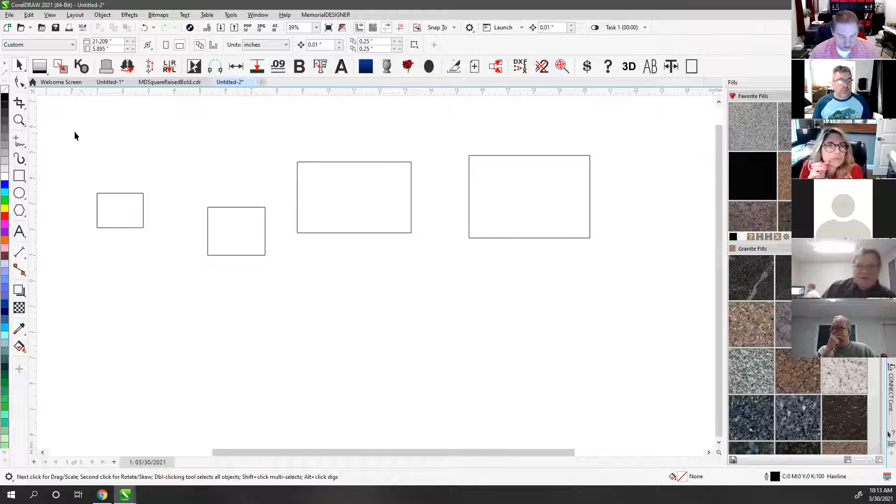Okay, so next is the orientation of your page, whether it's portrait or landscape. I'll turn on the page border so you can see. Portrait is going to rotate at 90 degrees, landscape is going to keep it the way that it was. I'll go back to having a letter size page just so you can see better how that works. So that's if you want to print it out portrait, and that's if you want to print it out landscape.

The next button is if you want to resize the page. So let's say we wanted to do a specific page of 12 inches by 12 inches and we hit enter. This button is whether or not you want that to apply to every page in the document, or the next one over is to apply it to the current page as opposed to all the pages.

So if we had multiple pages in our document, I'll just make a few extra pages down here. I could go to page 2, and let's say page 2 I want it to be 6 inches by 6 inches, and it's going to resize that page to 6 inches. But because I clicked on current page only, it shouldn't have changed this one - so this one's still at 12 inches. Page 2 is set for 6 inches, and 3 and 4 should still be at 12 because that's what they were before. So that's what these two buttons do - they control whether you want to change all page sizes or just the current one you're on.

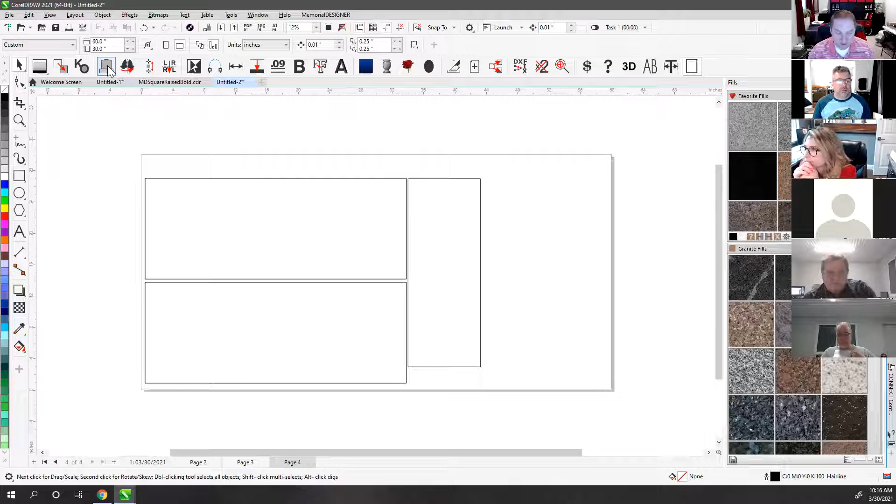So that's another thing that I would use pages for. There's definitely use to pages, but when I'm doing design work, when I'm putting together my shapes and that sort of stuff, I find that the page border itself gets in the way. So I turn it off while I'm doing my design work, and then I only turn it back on when I need to output to something specific.

The next one over is units, and that's just whether you live in America and want to use inches, or whether you're sending things off to Europe or Asia and need to go to different units. There are all sorts of units in here that you'll never use, that I've never used, and maybe I don't even know what half of these are. Ciceros and Didots, who knows? I mean, I could look it up, but they're not things that I'm going to use. Most often I'm using inches. If I'm doing things overseas, I'll use millimeters. And then if I'm doing things web-based, I'll use pixels. That's about all I ever do myself. But you can certainly use the other ones if you ever wanted to.

So if I was drawing in inches and I was going to send something to somebody in millimeter land, if I change that, that's just going to convert that over, right?

Yeah, so the way that units works is this is the units for your document. So if you switch it over to millimeters, everything now in this document is going to show up as millimeters. And it's going to save that way when you save the document, as millimeters being your default. So whoever opens it up on the other end is going to see that it's in millimeters. So if you get stuff from China or whatever, it'll often come in as millimeters because that's what it is. But you can always go up and switch those units over to inches so that you can see what they are in your standard measurement.

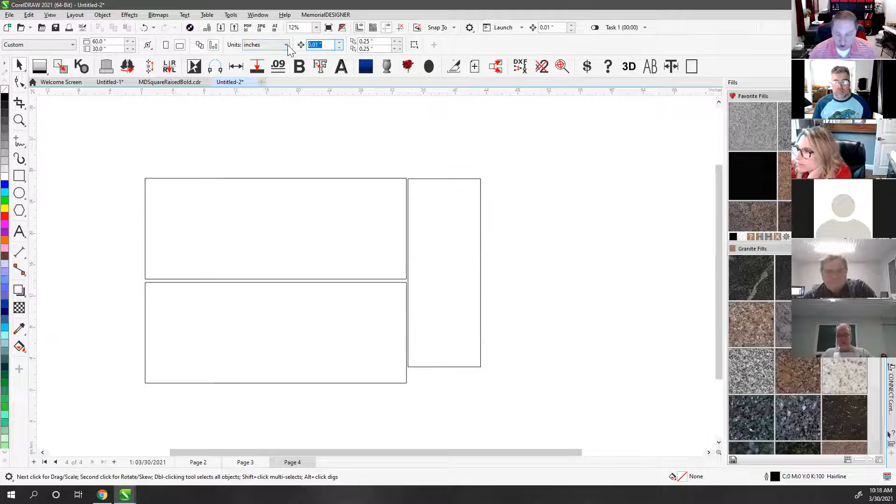The next thing over is called your nudge distance. Nudge is the distance for moving objects with your keyboard, the up, down, left, and right arrows. By default, CorelDRAW has a 0.01 inch nudge, which for me is too small. So I will usually change it to a quarter of an inch. That way, when I grab an object and hit the left arrow, every time it moves, it's going to move a quarter of an inch.

I can show you that here if I change my axis to 0, 0. So this is now at 0, 0. If I push to the left once, it's now going to be at -0.25 because I've nudged it once. If you hold Control, you can do a micro nudge, so that's going to be half that amount, or 1/8 of an inch.

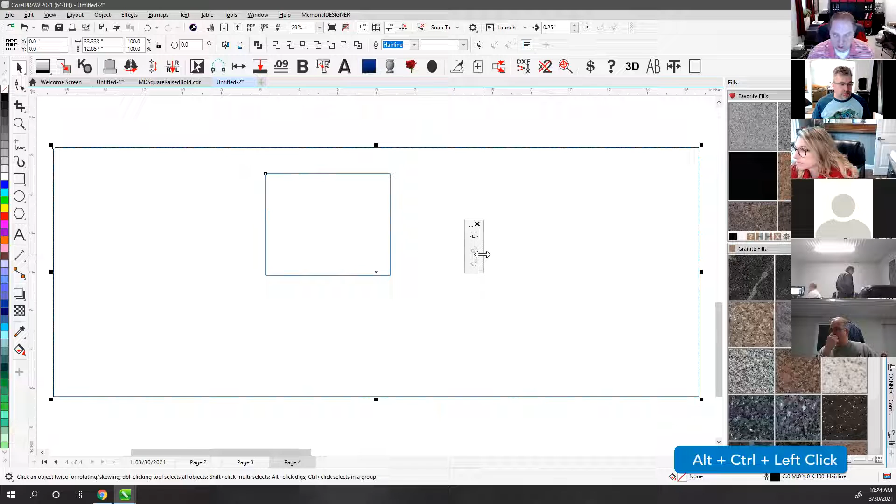To do that, it's the same kind of workflow, except instead of dragging onto a current toolbar, I'm just going to hold Control, Alt, and drag out here into the workspace, and that will create a new toolbar for me. Then I'll do the same thing and keep going to create my new toolbar. So now I've got a new toolbar—it just gets named automatically 'new toolbar.' You can rename it if you want to.

You just click on the blank space of it, say customize, new toolbar, toolbar, and say properties. And then that's going to go into the properties of that toolbar for you.

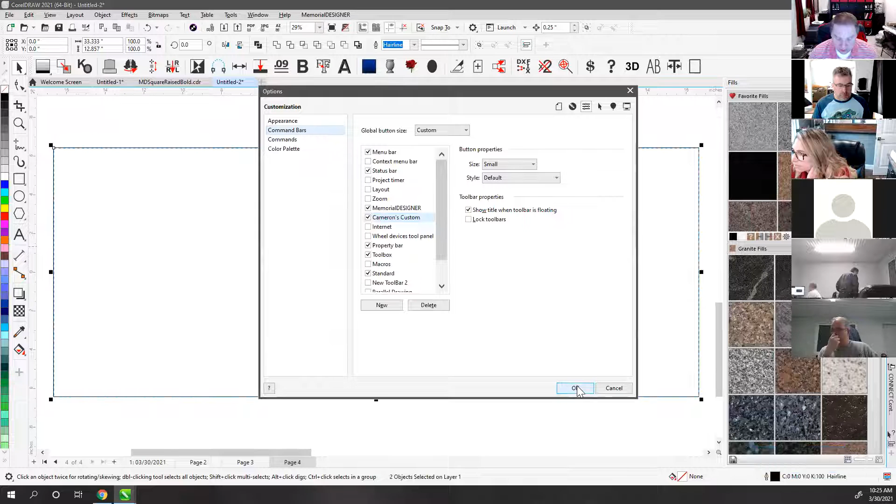And now I can double click, and you just kind of click and hold, and then I can rename this as Cameron's Custom or something like that.

So then I've got my own toolbar that I can mess with and add anything I want to it, and throw up here and place it where I want to. The reason it's not showing up is because I've got this little hidden toolbar up there, but now that I put it up there, I've got this toolbar right there.

So I don't really need these ones anymore. I'm just going to hold Alt, click and drag off onto the workspace, and what that will do is what it's supposed to do. Give it a second here. Come on.

Let's see if it works. Holding Alt, click and drag. There we go. So clicking and dragging, you'll see the cursor changes to an X, and that's because I'm deleting it. I'm just pulling it off and getting rid of it. So by holding Alt and clicking off into the workspace, you're getting rid of those toolbar icons.

That's why you'll always want to hold Alt, otherwise you're moving things around, right?

So now I've got my own toolbar here that I can add stuff to, and it's not going to mess with anything else. That way, you can also export out your workspace. You can save your workspace and that sort of stuff, so that you've always got this toolbar that you like, so that in future versions you can bring in your own toolbar.

Because every time you install my workspace, it's going to overwrite the workspace, and so your customizations aren't necessarily going to be there. So you either need to export your workspace as your own, or individual pieces from that workspace. But yeah, so that's how you can do that if you want to.

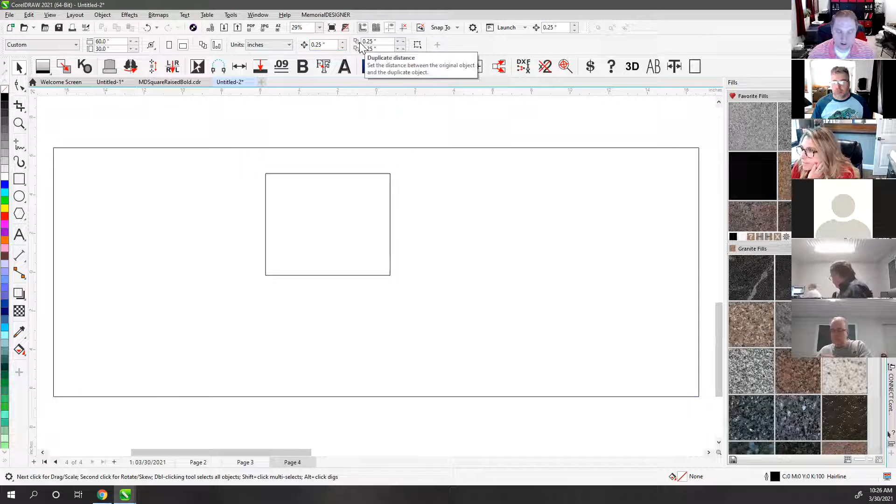So we've got our nudge distance. And then the next thing over is called the duplicate distance. If you have an object and you go up to Edit and Duplicate, or Control D on the keyboard, what that's going to do is make a duplicate of your item, but it's going to make it this far away from your original.

So we've got it set to go a quarter of an inch to the right and a quarter of an inch up. That way, every time you duplicate, it's going to move that much. So if I change this to 10 on the X and 0 on the Y, and then hit Control D, it's going to make a copy of it over here 10 inches away. I don't actually use duplicate a lot, but that's what it does if you want to use it.

And the last thing on here is treat all objects as filled. This is obviously an overlay that they're putting in that we don't have yet.

Hey, David. Yes, I think we're getting some background noise from you. If you could just mute yourself, unless you were talking to me. I think it was you, because you're the only one that's not muted. Thank you, sir.

So what treat all objects as filled does is it works as if this design had a fill in it. Right now I can't click it because it has no fill. But if I say treat all objects as filled, then anywhere I click inside of this object, it's going to select it as if it had a fill. I don't particularly like that, because I find myself selecting things more often than not that I don't want to select, which is why I turn it off by default. But that's what it does.

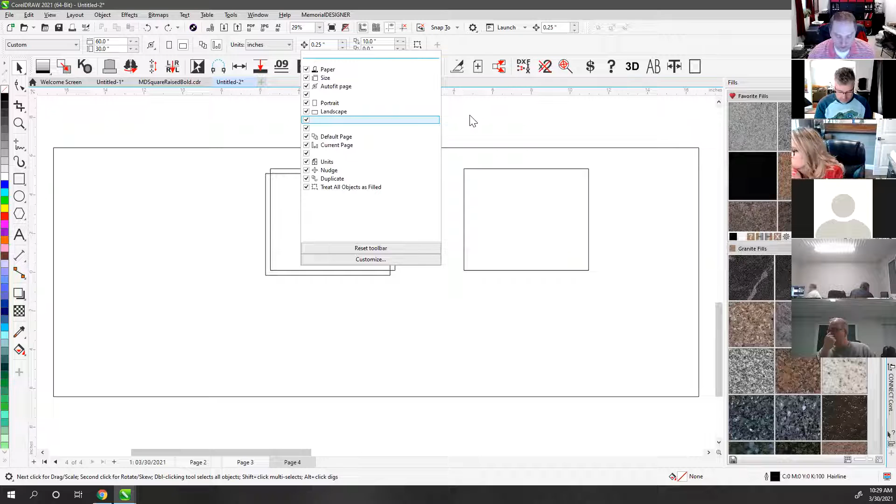Okay, any questions on that stuff, on the property bar?

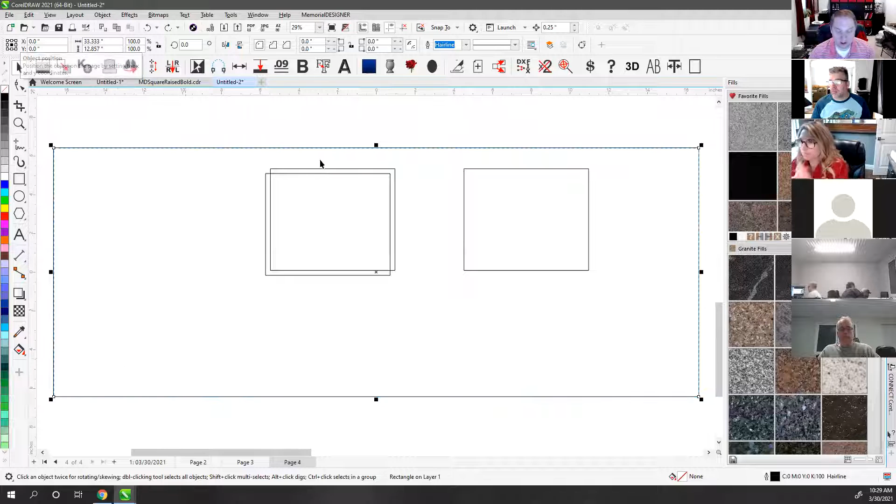Okay, so what you'll notice is as soon as I click on something, that property bar is going to change. Now all of a sudden I've got a whole bunch of other stuff that wasn't there before. I don't have the page stuff anymore, but now I have this, for instance, the object origin. So we're just going to talk a little bit about the property bar for selecting standard objects.

I'm going to draw a couple different things here so you can see. If I click on this line, or if I click on the rectangle, you'll notice some of these tools change. The reason for that is because the properties of this object change and they allow certain things to happen that other objects don't. So this is going to change often, based on the thing you have selected, based on the tool you have selected.

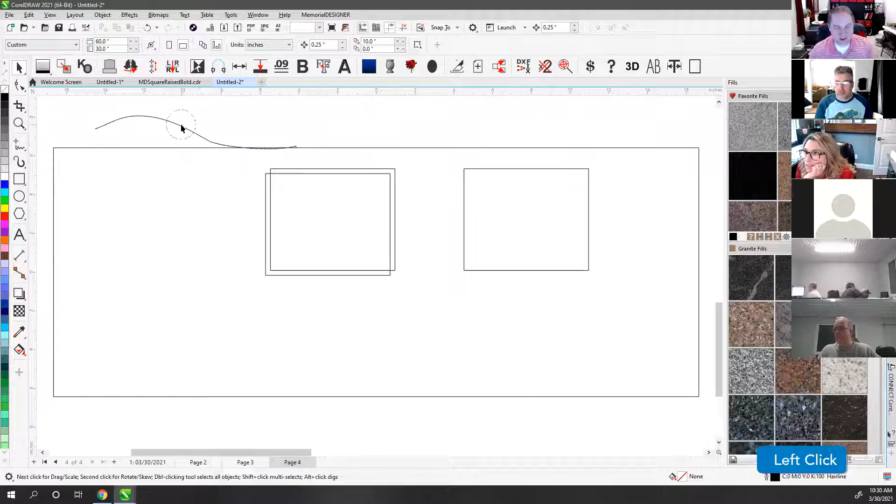So if I select a shape tool instead, it's going to give me different options as well. I would guess probably each one of these different scenarios would need to be a video all by itself because there are so many different things it can do. But we'll just talk about a couple of them today.

So the first one is, if I were to just select this rectangle, for instance, we've got up here something called object origin. The object origin tells, when you are resizing things, how it needs to grow. So right now it's growing or shrinking from the center. If I were to change this size to 10 inches by 10 inches and hit enter, it's going to stay so that my center stays where it's at.

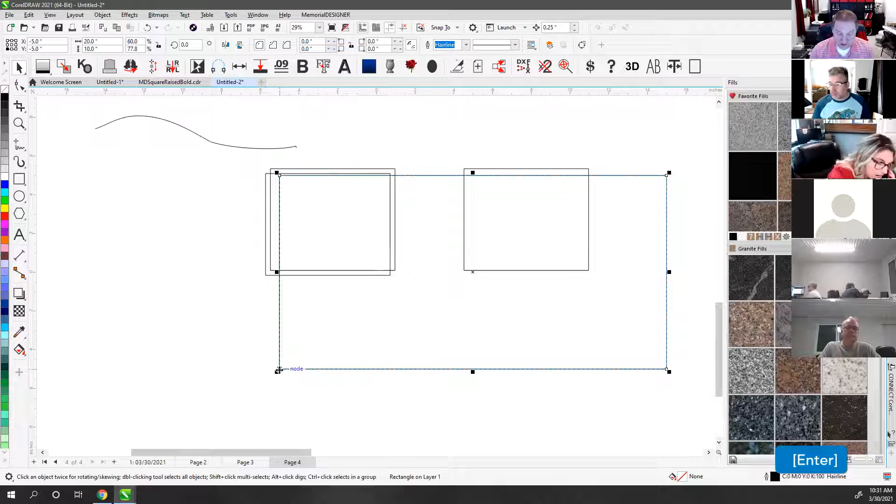If I change the object origin by clicking on one of these 9 boxes, that becomes the origin. Now my lower left-hand corner is the origin. So if I change now to 20 inches wide, it's going to stay here at the lower left, but grow to the right. If I change it to 20 inches tall, it's going to grow upward instead of how it was before, based off of center. You'll also notice that it changed what are called your object position, which is your XY coordinate.

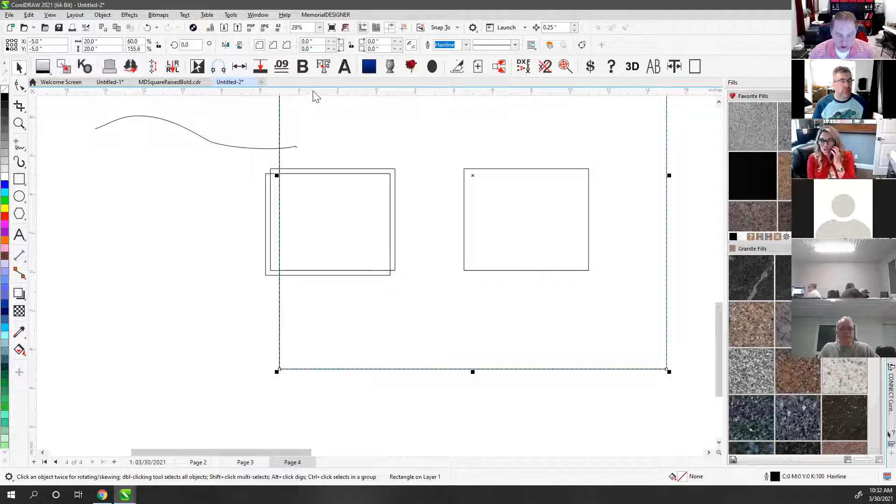If you look at your rulers, this is the coordinate of your origin. So if we look at the ruler here, 0 and 0, our object origin is -5 this way and -5 this way. And so that's the bottom left-hand corner of our object, is -5, -5. If we wanted that to be at 0, 0, we can tell it to be at 0, 0 in the bottom left-hand corner, which then changes all of these numbers. Depending on which one we click, it's going to change because that's how big our object is.

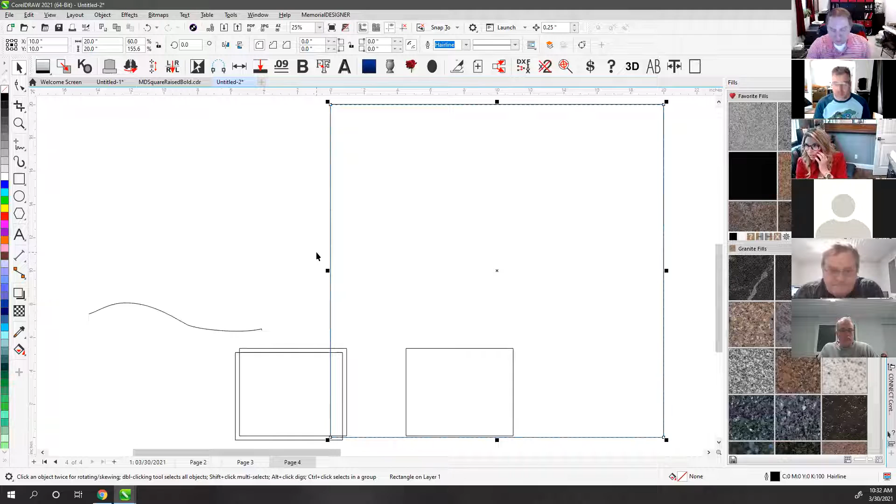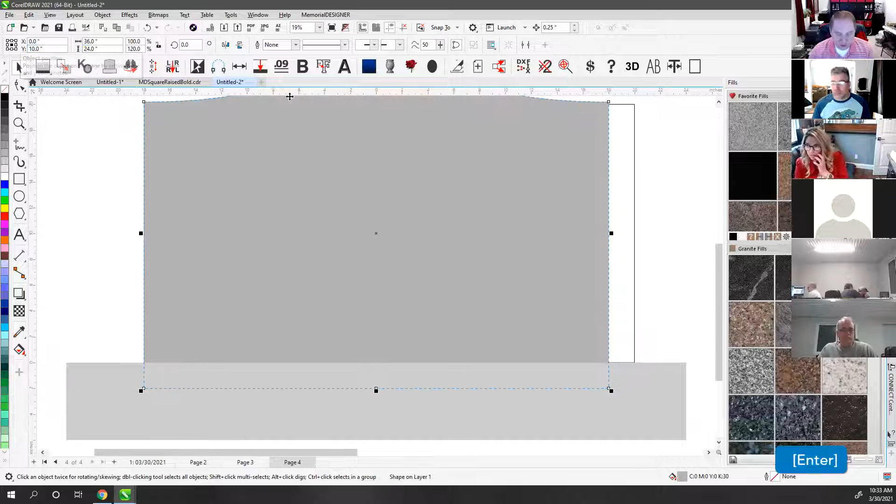The reason you would want to use this more often than not is because you want to size an object to a specific size, but not move it in a certain direction. So for instance, let's just say I had a shape like this. I started with my shape builder and I wanted to make this taller, but I don't want it to go down into the base. If I just made it taller right now, let's say I made it 24 inches, it's going to go up by 2 and down by 2. So now it's going into where the base is.

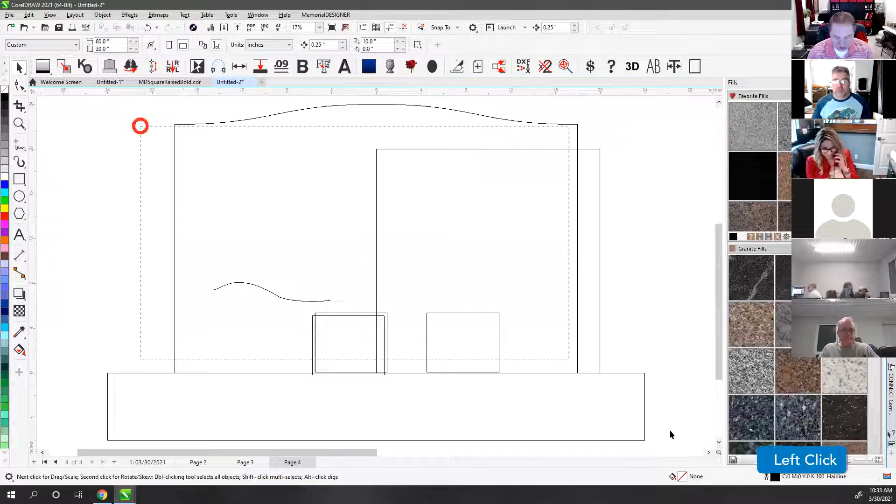So if I undo that and instead change my object origin to the middle of the bottom, then as I change this size, it's going to only grow upward as opposed to any other direction. That's one use case for why you would want to use object origin. Get rid of the rest of the stuff. Again, that's not going to show up unless I have something selected, because when nothing is selected, there is no origin. So I have to have something selected in order for that stuff to show up.

The next thing over, like I already mentioned, is your XY coordinate. So positive is this direction, negative is this direction, same thing for the Y axis. Y is up and down, X is left and right. Those are where they sit on the ruler. This is how big the actual object is. So it's 60 inches wide by 30 inches tall, and that's at the tallest point, which is this point here. It's not giving us how tall it is to the edge right here. It's giving us how tall it is to the tallest point.

One nice thing about these is you can do math inside of them. You can change your units inside of them. So we had talked about going from inches to millimeters before, which is nice.

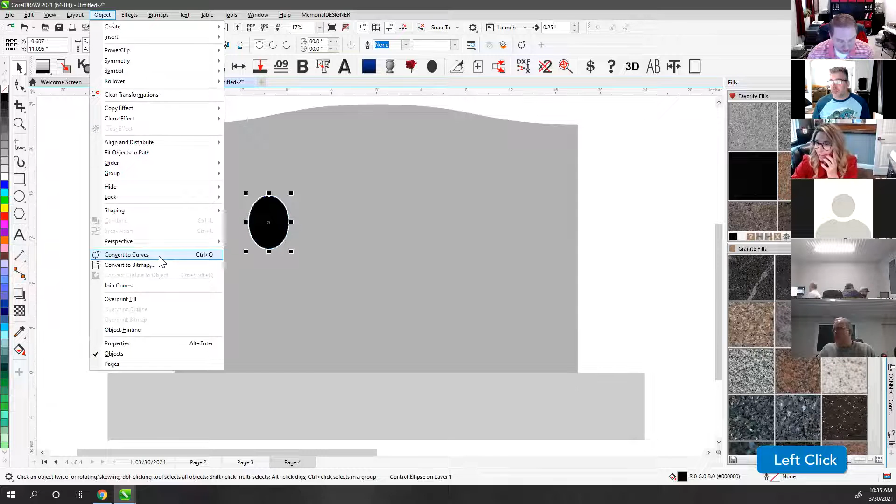But if you wanted to do that on the fly, let's bring in a ceramic really quick. I'm going to click on the ceramic button, and that's going to bring in a ceramic for us. I'm only going to get to the very inside of this, so let's clear my contour so I'm only showing the very middle portion. So I've got this oval, and right now it's 3.543 by 4.724.

The reason that's such a weird number is because it's 9 by 12 centimeters, and it's doing the conversion automatically. If I wanted to stay in centimeters but don't want to go back and change my units, I can simply type in 11 and then cm for centimeters, and let's say 15 cm, and it's automatically going to convert that into inches for us.

If we wanted to do any sort of math, let's say we wanted to make sure it's 0.09 inches bigger than what it currently is, so we've got extra room to blast it deeper or something. You can do a plus sign and then 0.09, and do the same down here, a plus sign and 0.09, then hit enter, and it's going to do the math for you inside that box to make it grow the size you want. So I like that it's got that option to convert units and everything else right inside those boxes, which is really nice.

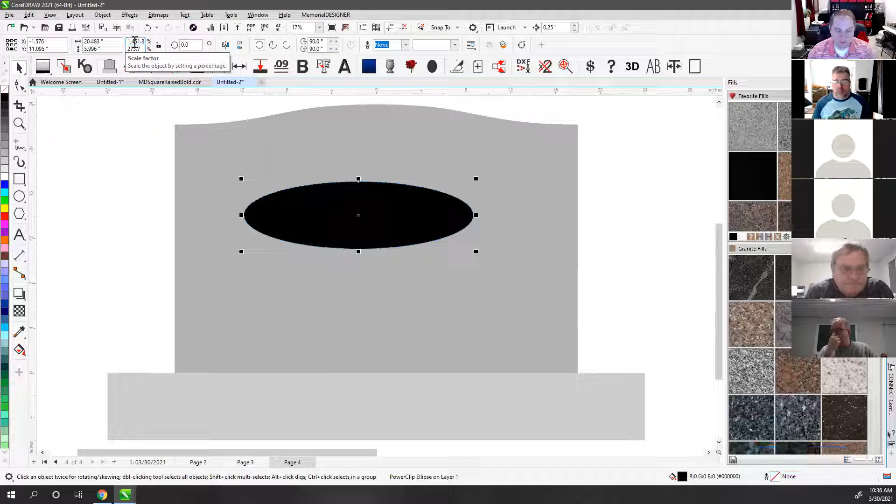The next thing over is your scale factor. That's how big it is compared to how big it used to be. We've resized this, which tells us it's been scaled. If these numbers aren't the same, it means it's been stretched. So if I stretch this out, you'll see that number gets bigger than this one, which is an indication that whatever you have has been stretched in one direction.

If you want to resize things and make sure they do not stretch, if I just type in 6 here, you'll see it's going to stretch. If you don't want it to stretch, there's an option right next to this lock ratio, which is going to lock that so it has to be proportional. That way, if I change this to 300, it's going to change this one proportionally so it doesn't stretch at all. Or if I change this to 4 inches, it's not going to stretch at all, because I have my proportions locked. If I don't want to lock my proportions, I've got access and control over how big I want this to be exactly.

So that's what the scale is, and that's what lock ratio does. I added in the most recent workspace the keyboard shortcut Control-Shift-X, so I can lock that ratio on the fly. If I want to, just hit Control-Shift-X, it's going to lock it so that if I type it in, it's going to be proportional or not.

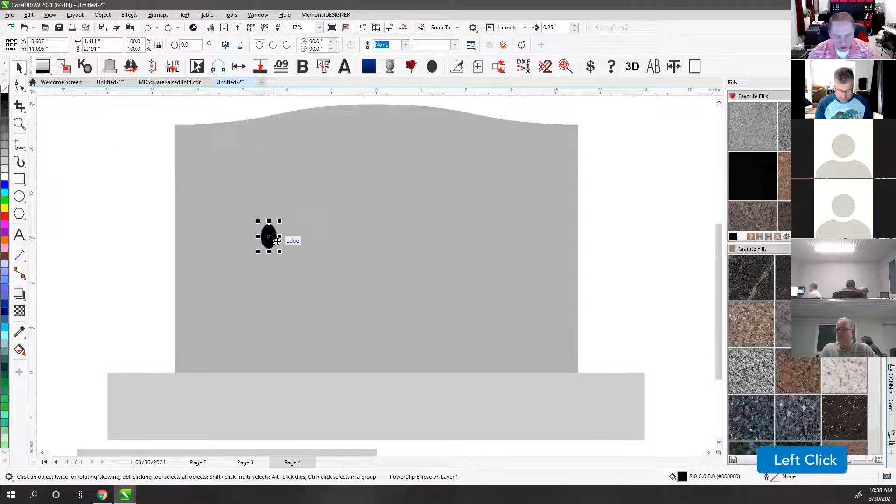The other reason for that is I added the ability to do Shift-X, and by doing Shift-X, it actually pops up your object size right down by your object, as opposed to having to move up to the bar. So I can just hit Shift-X and say I want this to be 7 centimeters and 13 centimeters, hit enter, and it's going to resize without me having to move my mouse up here, which is kind of nice.

And that's, again, I think only in my 20 - actually, I don't remember. I just know it's in one of the most recent workspaces. It's not in my older ones.

Next is angle of rotation. That's just if I hit 90 degrees or whatever, it's going to rotate 90 degrees. If you do negatives, it's going to go the opposite direction. You didn't really notice other than this node there, but let's say I do negative 45 degrees, so it'll rotate negative as well. If I click and drag, you'll see that update as I rotate it. This is just degrees, so that's what that means.

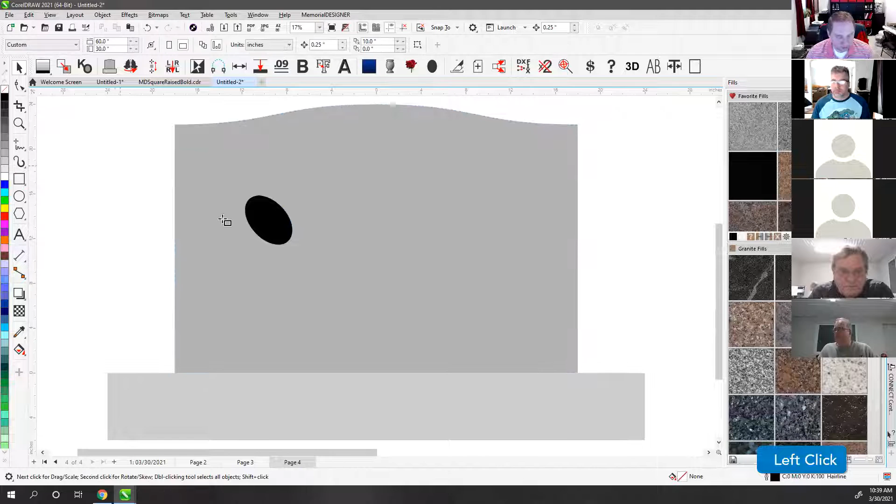Let's make sure. Yep, same thing, back on the rectangle, same things.

So the next ones over are mirror horizontally and mirror vertically. What mirror does is, if you have an object and you want to mirror it on itself, not on any other object, you click mirror horizontally and it's going to flip it on itself. If you click it this way, it's going to flip vertically on itself.

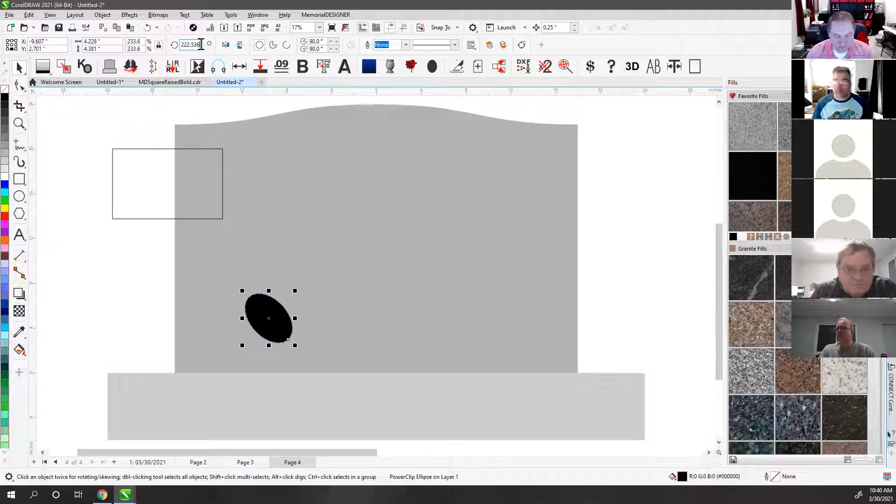Which it shouldn't actually do that. That looks to be like a bug to me. I'll have to play with that some more. But what did it do? It actually flipped. You see how it flipped further down? Oh, it shouldn't flip further down. It should only flip on itself.

Is that because of your location on the... Oh yeah, well, could be. The center ones? Yeah, that could be. You're right, I bet you're right, because of my object origin. Once a week I am right, and today I just used it. So that's not a bug, that's just me not knowing how object origin works.

Look, if I change it here, then I guess it's going to flip upward. That's cool to know, though. There you go, we all learn. Yep, good job, Charlie. Woo. I don't have to send up a bug report.

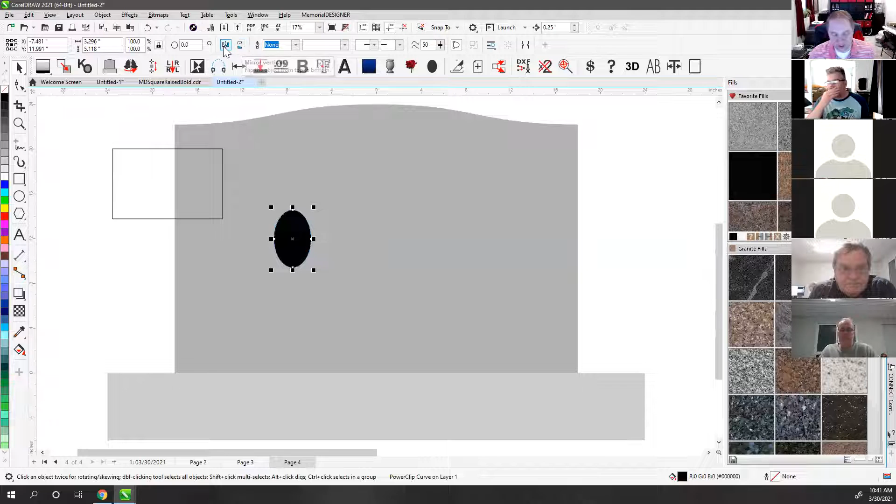So that's what that's doing, is it's flipping on itself, or on its XY axis, on its coordinate system, in either the horizontal or vertical direction.

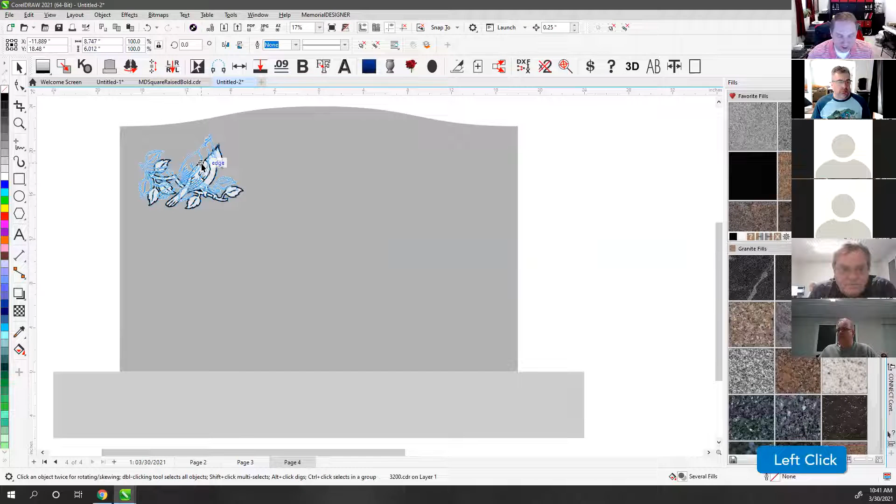So just to bring in a better example than a circle, if I brought in a design of a bird or something, and I had this bird here in the corner, maybe I want that bird to look inward, but maybe I don't. So if I wanted to flip it on itself, I would just click on this, and now it's going to be looking out instead of looking in.

So I think that makes a little bit more sense than a circle anyway. But that's what mirror horizontal and vertical do.

The next one over is our outline width. Unless I'm on rectangle, it's not outline width. So we're going to go back to having a rectangle selected, because rectangles have special options. And so that's why these show up, is because this is actually considered a special object called a rectangle. You can see down here on the bottom, it says rectangle on layer 1.

So it's got special options where it will let you change your corners with these options, and then you just choose a size. So let's say we want 1 inch for our radius. It's going to let you change that corner, whether it's a scalloped corner or a chamfered corner or a round corner, depending on how you have that set. And then these are your numbers for how you want the corners to be.

This is whether you want it to change all at the same time. So if I change this to 2 inches, it's going to change it all at the same time by that same amount, which in this case made it 2 inches larger than that one. So I probably want to do that.

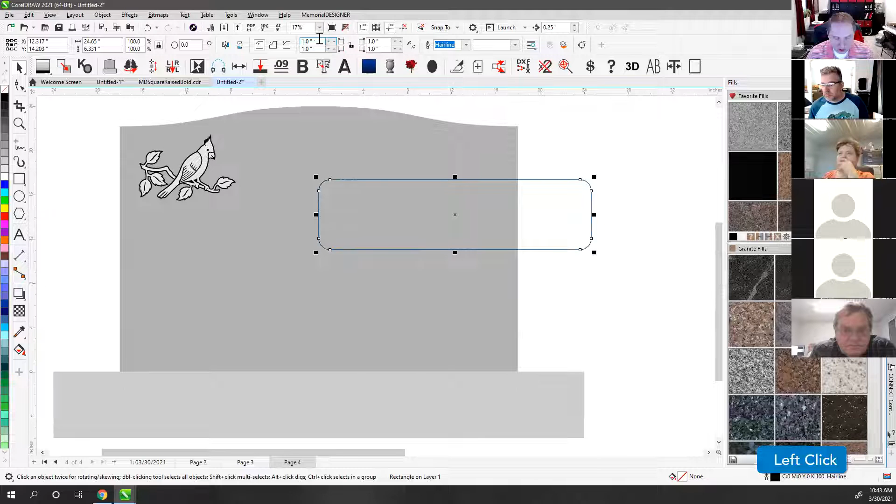The reason that happened, I believe, is because of this right here, which is relative scaling. If I had that unchecked, then I think what happens is, so I'm going to change one of these to a 3. Yeah, because then you can leave the bottom squared if you want even. And that's really cool for some nice shape effects and panels too.

Yeah, for sure. So I think if I change this one to a 4 now, we'll see what happens. I guess it stayed the same, but it relatively changed it the same amount. So that's what this does, is it's going to scale your corners.

Well, okay, let me say that again. Relative is, it's going to make it so that these corners scale as I shrink this down. It's going to scale it if I do that. If I didn't have that selected, then as I drop it down, I think it keeps those. All right.

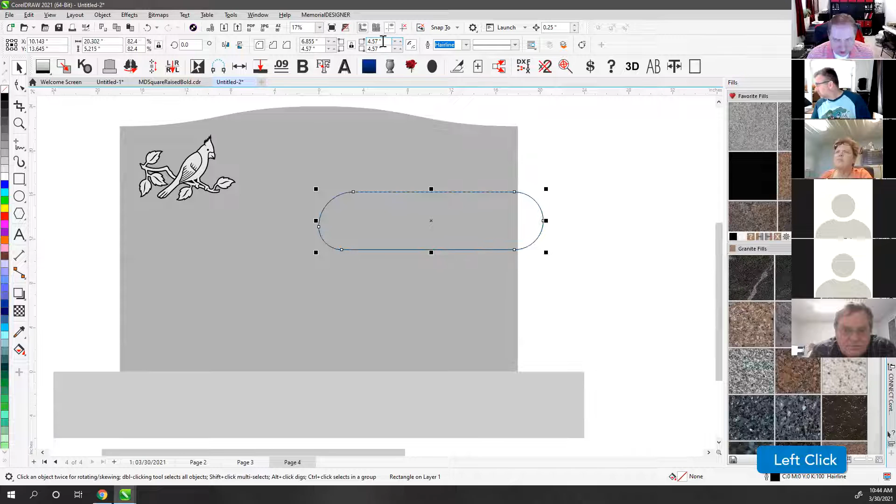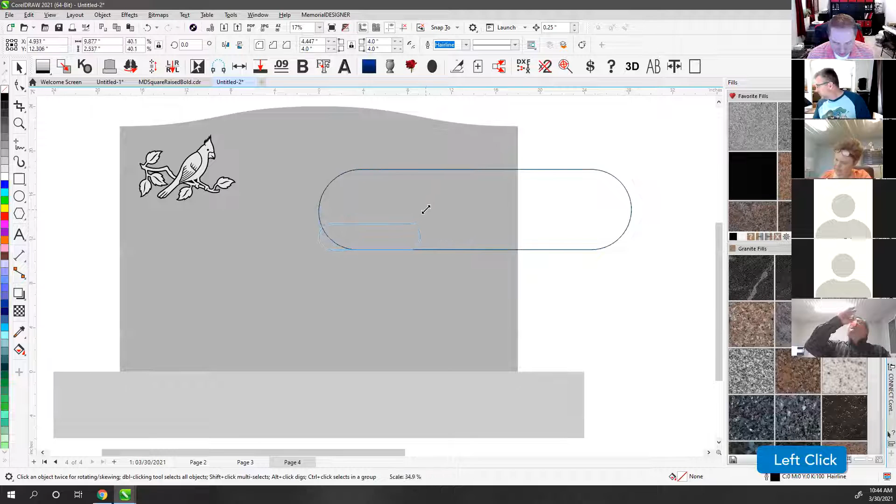That doesn't seem quite right. You can see my numbers moving here, right? But when you have this unchecked, they're staying the same. Sorry, they just didn't stay the same until I released it. So if I had this at 4 inches and scale it down, they stay at 4 inches. It's just so small that it doesn't matter. Anyway, so that's what scaling is, whether you want those to change as you resize your object or not. So you can check that and it'll resize.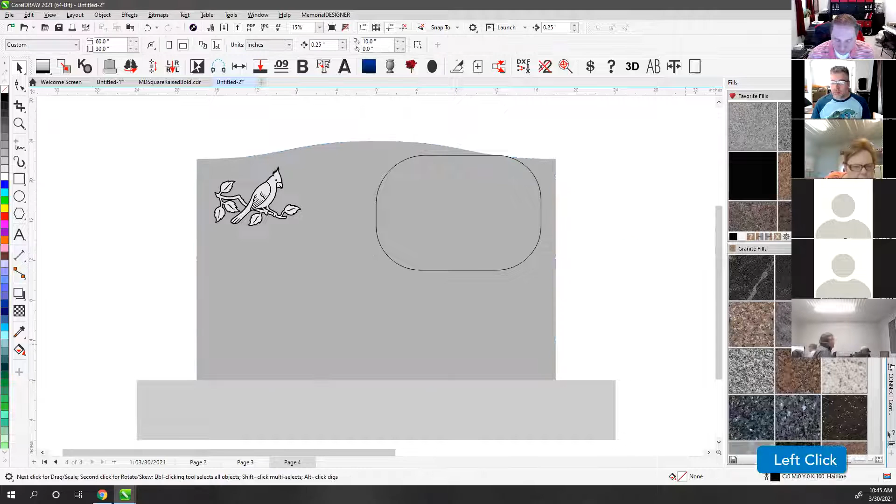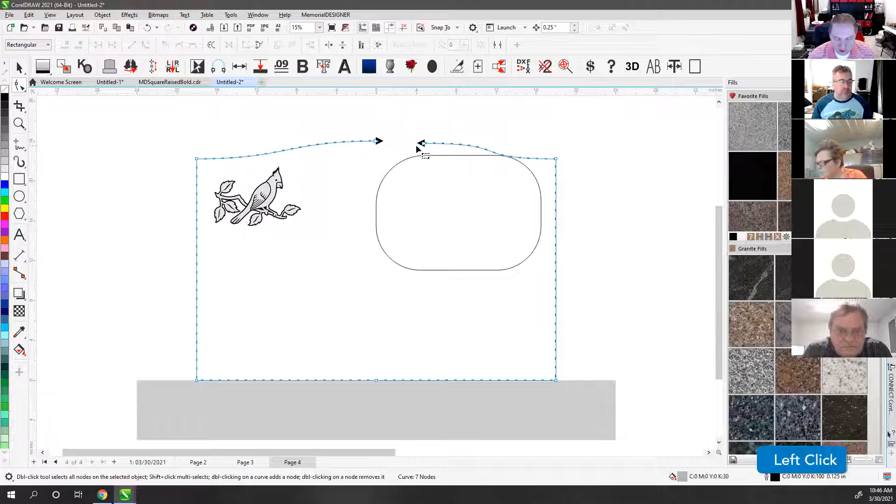The next thing over is your outline width. And when we were back on just a regular shape like this, that was going to be the next one, is outline width. So depending on what we have selected, that changes whether or not those other options are in there. Every object can have an outline. I currently do not have an outline on this object, so it says none. You can also see in the lower right-hand corner, this is where your outline shows up here and your fill color shows up here. So it's got a fill color, but it doesn't have an outline. If I change this, there's a drop down that allows me to change it, or I can type in an amount. Let's say 0.125 inches, and it will outline my object in that size. It also outlines it based on this line style, and gives me start and ending arrows based on what we have selected here. So right now this is just a solid line with endings you can't really tell the difference of. But we could change this to a dotted line, and change our ends to arrows. There's options for doing crazy stuff like that, but you're not going to notice the arrows unless you break this apart so it's an open shape. Then you're going to see those arrows. But otherwise, it's just going to show up like that.

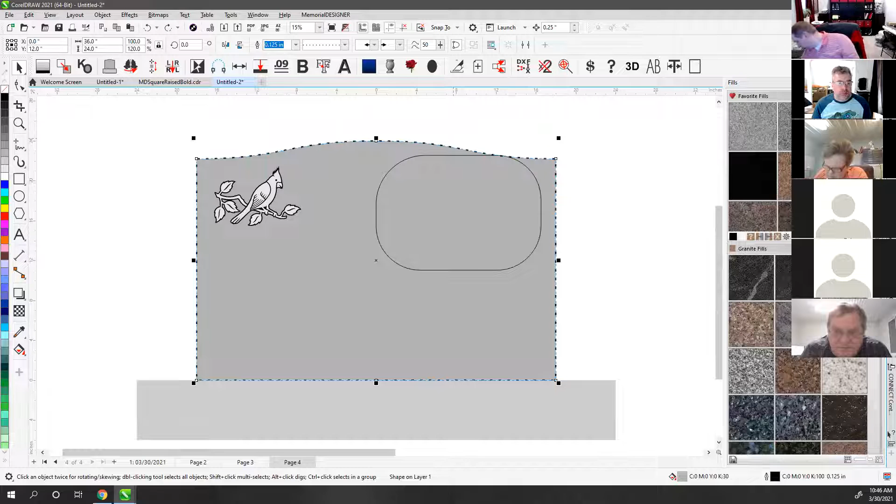How's everybody doing? Can't complain, Charlie. How are you? I'm great, getting good entertainment while Cameron's busy. You gonna do a little skit for us? Yeah, I'm gonna get some hand puppets so I can do some puppetry in the future. Well, I got Prince Naughty Naughty, he'll come down I'm sure again. There we go. How about Rue? You could pull Julia, Rue in. Yeah, I'll be back in just one second, I got to email something off really quick. Oh, take your time, we're gonna have a song, sing along. We're gonna do it in like, what do you call it when you do it in rounds? Oh, you have yeah, enough people to really do. Yep.

We can see your email. I'm not looking. It doesn't really matter, I just need proof of residency. So I'm looking at my, what is it called, my utility bill.

Let's see here, Julia, I didn't see when you joined. Did you miss much of the beginning? I did, I couldn't get logged in. Actually, I was etching and forgot, and Brandy calls me, she goes, I need the link to get into the meeting. I'm like, oh crud, I'm running in the office, late for class, woohoo. Well, I hope we didn't interrupt your etching too much. No, well, I'm like, at least he records it, because I was just feeling panicky, like I missed the first 15 minutes. Not a problem. No, you're like, I'm thinking, oh crud, what am I missing?

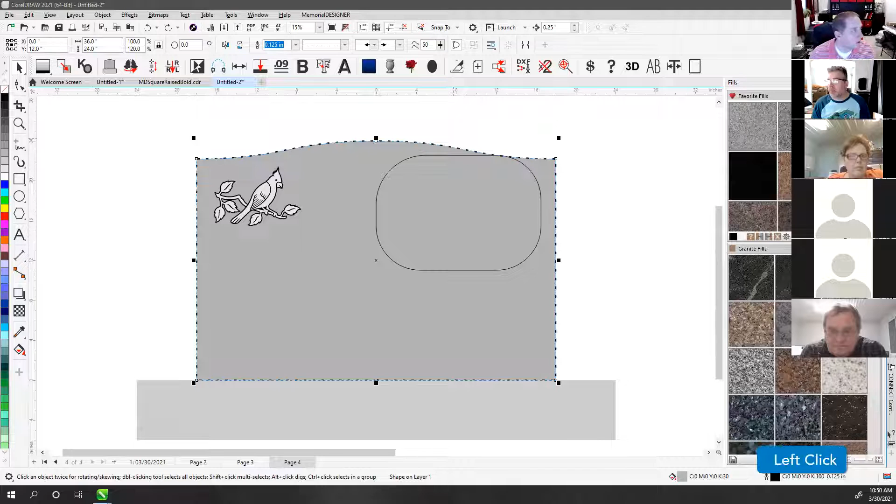Okay Charlie, I'm gonna ask a question. So I have a praying hands that I put into the grayscale stone, but the outline is not filled in. So imagine that bird there, but it didn't have a black outline. How would I fill in the outline? The outline is there, but it's not filled in, and when I hit it, it just stayed the frost color. Okay, so click on the black outline, the outline that you want to be black, and press the 0 key on your keyboard. That'll just fill in the outline, see if that will work. Now, is it filled in with a different color currently? Nope, it's the same color, it's frosted, the same as what the bird would be, maybe not even filled. Okay, well then you can also double click on that line and just make sure all the nodes are connected. Okay, yeah, and now if you want, you could always just email it to Cameron, or when Cameron's back, you have a, you don't have to answer this now, but do you have an email address for questions for training?

If someone was going to send a file regarding something you made, the best email for questions is support@memorialdesigner.com. Send it there and someone will get back to you. That someone will be Cameron, but we'll say someone - he monitors that email address.

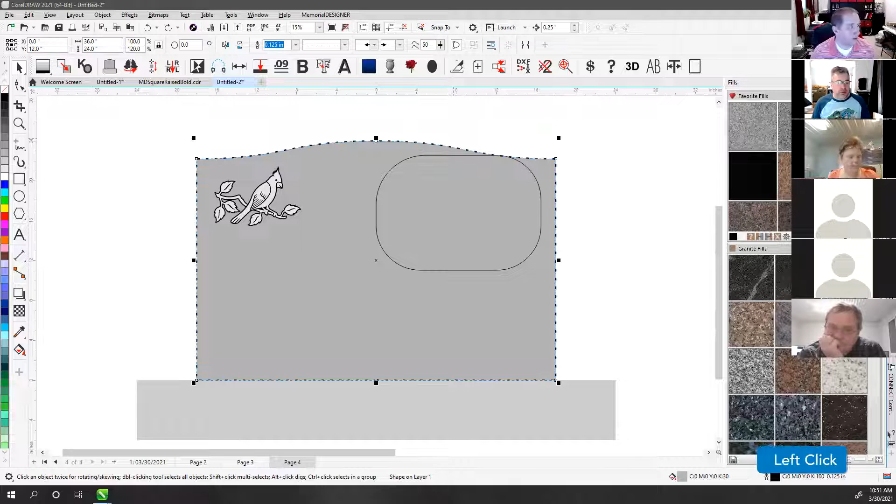Julia, is that open on your screen right now? No, it's on a different computer. I just wanted to make sure we could jump on it real fast and take a look. Sorry, it's fine - I just couldn't figure out how to fill the outline without filling the praying hands and vice versa.

It really depends on the way the object is built. If we look at this bird, for instance, it's actually a group of objects. So if I change it to blue right now, it's going to change everything to blue, because it's a group and the change applies to the entire group. If I don't want that, I have to select an individual piece inside the group, or ungroup it. If I hold Control and click, it digs into the group and selects just that piece, so I can change it to blue and only that piece changes. That's exactly what was happening - it would all turn one color. Most of the time that's because it's grouped, and you can tell because it shows these ungroup options up here when you have it selected. Those won't show up if it's not grouped - instead it'll show the option to group it.

But that's only one scenario - it could also be that it's a contour, and that's a little different, because contours are a little different animal.

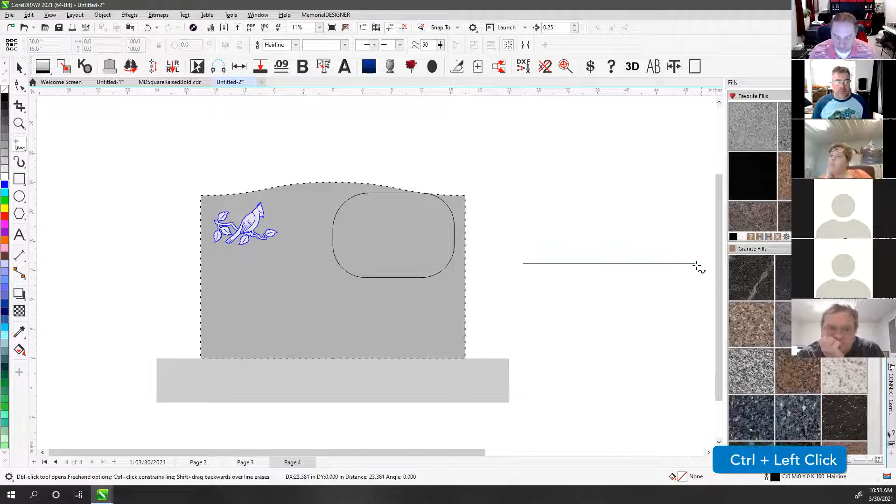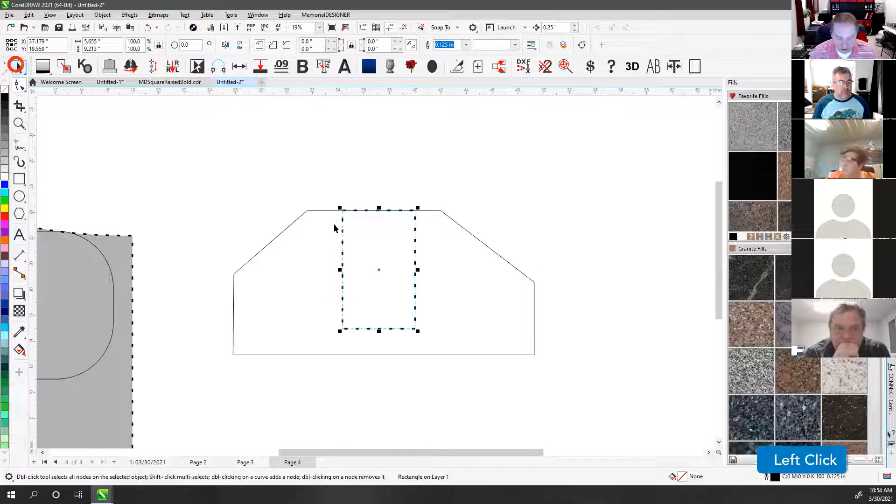Sorry for the delay - I got my things sent off, now let's talk about our outline. You can change outlines if you need to. I don't do a lot of outline changing, but say I've got the side view of a bench with a cremation item inside of it. Sometimes I want to show this but indicate it's inside another object, so I'll change the outline to a dotted pattern and maybe make it a little bigger, so it shows there's something there without showing it as an actual outline on the object. That's one use case for changing my outline.

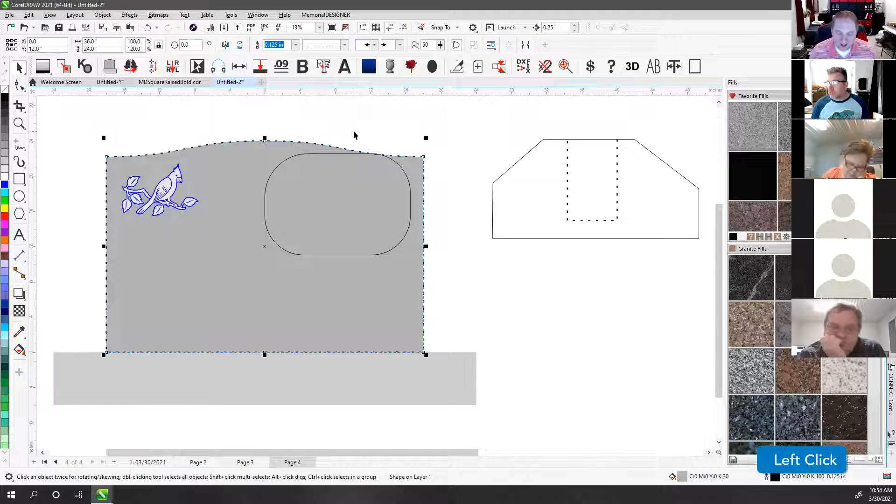The way the outline works: if we go to the outline property, I'll double click my outline properties down here to pop up the actual properties. There's a lot more to this outline than just how it looks - whether we want certain corners, whether the outline is centered, goes to the outside or inside, whether it has caps. There's a lot of information here. We'll cover that in a different video, but just so you're aware, outlines have certain characteristics and properties, so they may or may not show up the way you want.

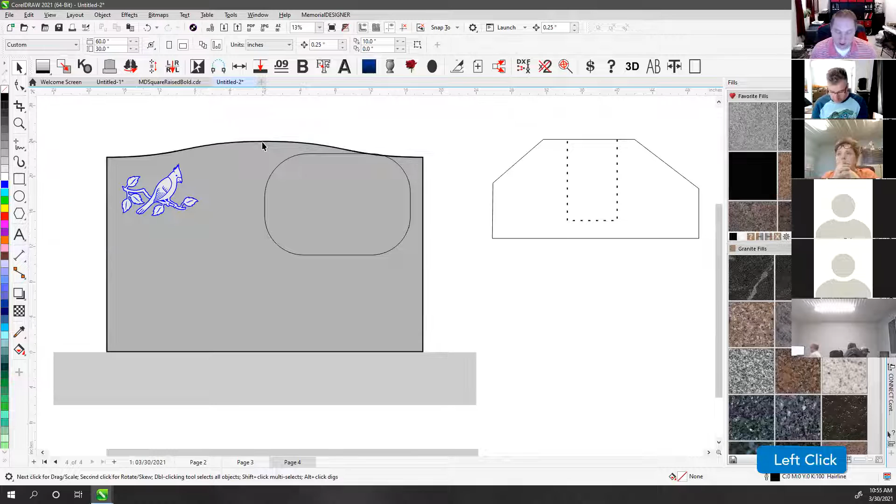Right now I have it centered, so you can see my dotted line, and my outline goes inside and outside of that line. If I changed it so my position was to the inside, it's going to build my outline to the inside. It's very similar now to a contour - we can get to that later. They used to be a lot different, but now they're getting more and more similar in the way you're able to do certain things.

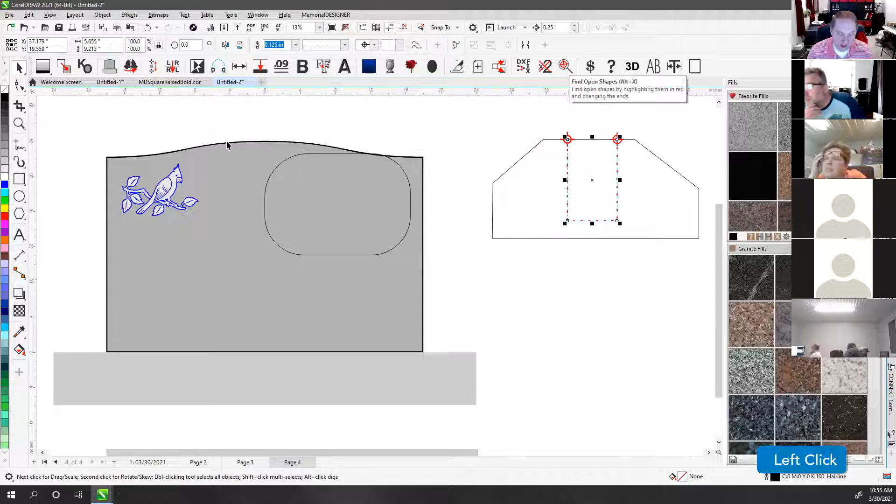The one use that I really use for arrowheads is this button here, my Find Open Shapes. When you click it, it actually changes my ending points to these so I can see them better. You can notice up there now they've changed to different arrowheads, and that's why it does it, just so visually I can see my broken endpoints better. So that's one, I like that - another use case for that.

I did show one other use case at MBNA in 2018 of being able to create your own arrowheads. I don't have them currently installed, so it's not going to make a whole lot of sense, but I had created arrowheads that were actually the ends of crosses. Depending on what cross style I wanted, I could simply change my arrowhead style and make crosses with certain endings, which was kind of fun and cool, but really just to show off. I like it.

Okay, so we'll go back to our rectangle here. That's what these do, is change your width and your style.

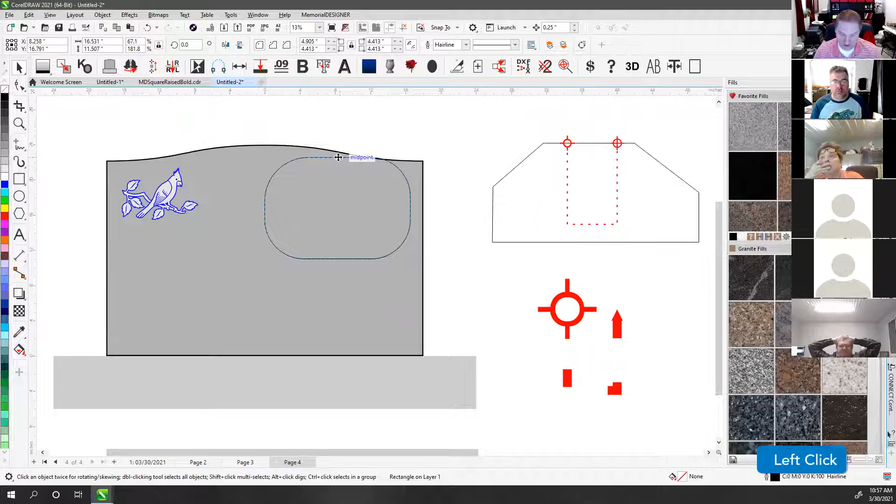And on this one, since we can change this into a paragraph text box, it's also giving us options to wrap our text and how we want to wrap it. I'm not going to turn it into a paragraph text box, so I'm not going to mess with that.

These ones are important though, to the front and to the back of your layer. Because we have things layered, things in front of other things, we can see this because it's in front of the stone shape. But if all of a sudden we told it to go to the back of the layer, or shift page down, you can't see it anymore except for right there, because it's behind something that's filled in and bigger than it. So if I click this...

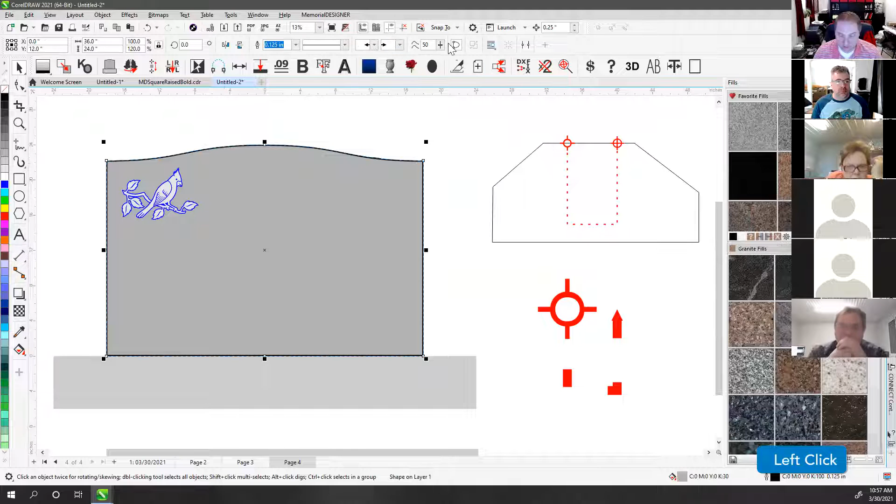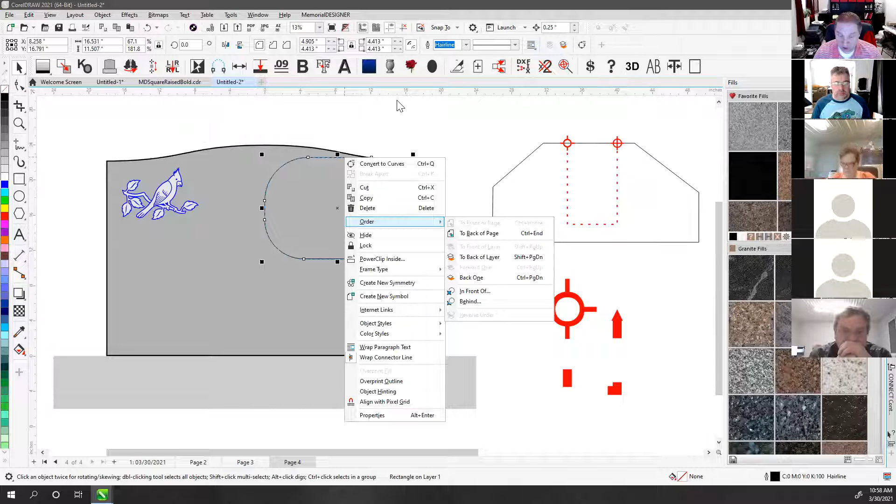Now all of a sudden this shape, that front and back option doesn't show up because it's not on this other property bar. So sometimes you're like, where did my button go? Where's my to front of layer or to back of layer button? Because it's not on here. That's when I use keyboard shortcuts a lot, shift page up, shift page down, or right click. A lot of times right click is going to have different options as well - it's got the same ones, back of layer, front of layer. So even if those don't show up on every bar you want, you can still access them, they're just in a different location.

The last one is convert to curves. Because this is a rectangle, it's a special shape that is not considered curves - I can grab these and move them, it's special properties of a rectangle. It's not going to work the same way as curves. So if I convert it to curves, now it's going to work just like any other time I build things based on curves, where I can take my nodes and move them. But that's not going to happen unless I convert it to curves first. That's why they give you the option to convert to curves when you have a rectangle selected, because that lets you modify it differently with the shape tool.

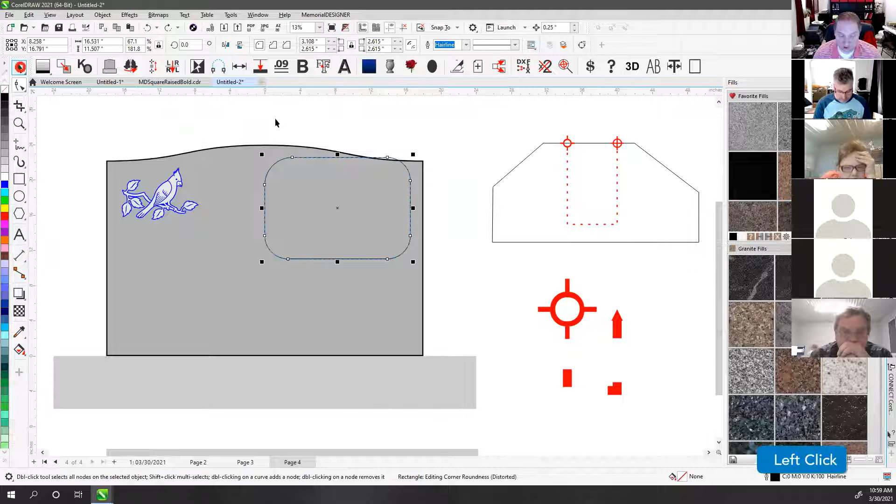If I had selected this, it's not going to give me the convert to curves option because it's already curves, so it's not going to convert. It already is curves, right?

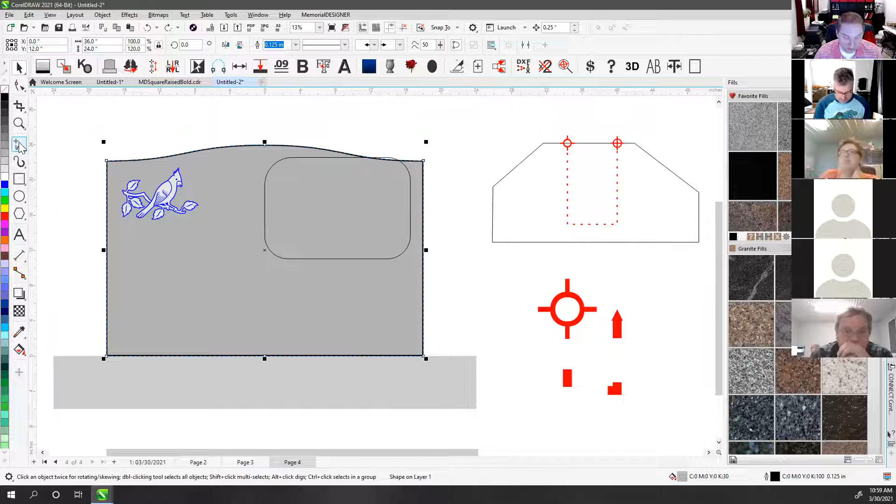But it does give me different options. Because these are curves, whether it was drawn that way or drawn freehand like this, it's giving me more options now. This one here is how much smoothing is applied. This especially works when you're drawing with a freehand tool. It tells me how much I want to smooth that as I draw it.

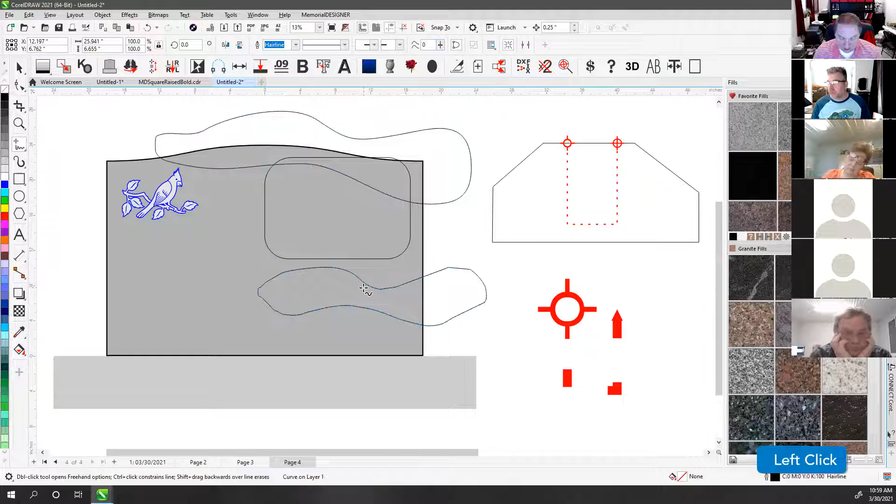If I do 0 and start drawing my shape, it's not going to make it very smooth. If I come in here, you'll see it's pretty jagged. I mean, it's not horrible, but there's some jaggedness to it.

Especially right there. So freehand smoothing makes it so that as I draw, it's going to smooth that out by a certain percentage. If I change it to 100, it's really going to smooth it out, but it's going to look a lot less like my original object because it's smoothing to make it a nice smooth curve. So that's what freehand smoothing does, changes how much smoothing is applied to your curves as you draw them.

And the reason it shows up on this one, even though we didn't draw this by hand, the computer did—our code drew this—and so it is using curves to draw it, and that's why it still shows up there.

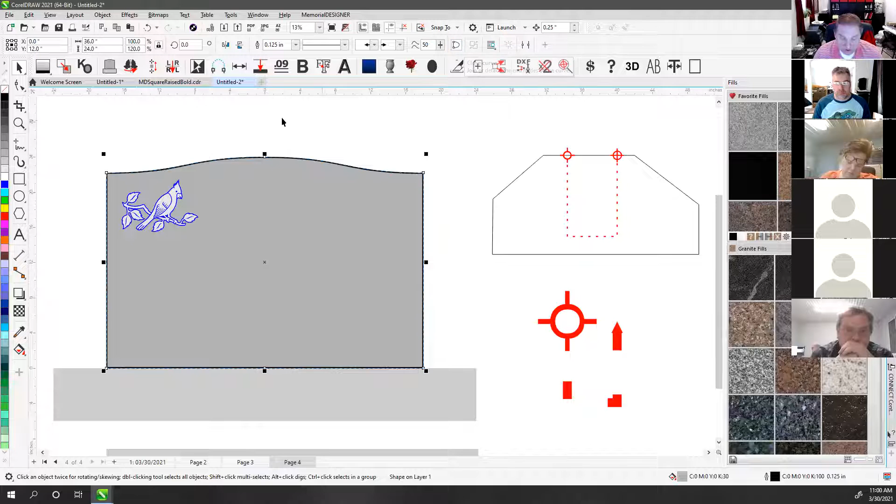The next one over is called close curve. That's going to make it so that if your curve that you are drawing was open like this, there's an open end, it's going to show up as this icon because it's open. There's a gap from there to there. If you click on that, it's going to now be closed. So this is actually a visual indicator as to whether or not your object is closed.

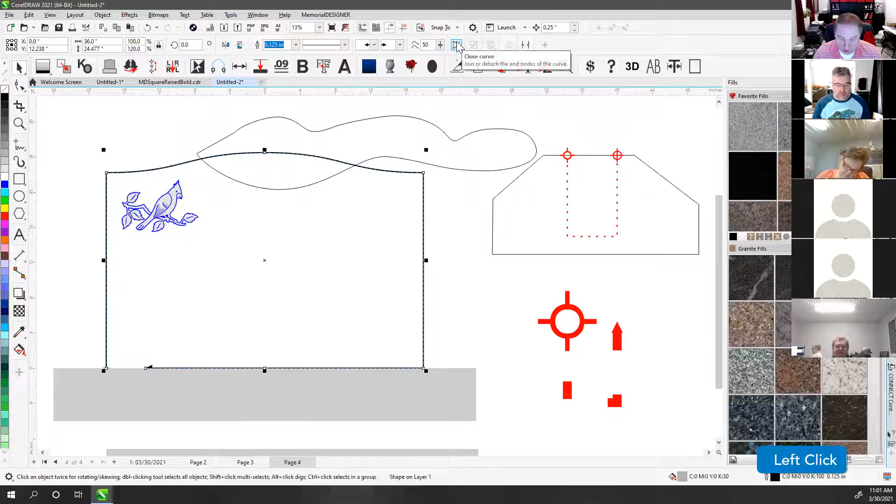This one is closed. If I break apart like this, move—oh, I guess I broke it over here. So if I break this apart now, you'll see that this is showing that it's not closed anymore. So as soon as I click on that, it's going to close it in, and it's going to fill it because it's a closed curve now that can be filled.

This one's also got break apart on it. The reason for that is that if I had multiple objects like this bird here, that's actually a bunch of different objects combined together, then that would show up, because if I click break apart, it breaks all of those into individual pieces. So that's why that one's on there, to give you quick access to being able to break it apart.

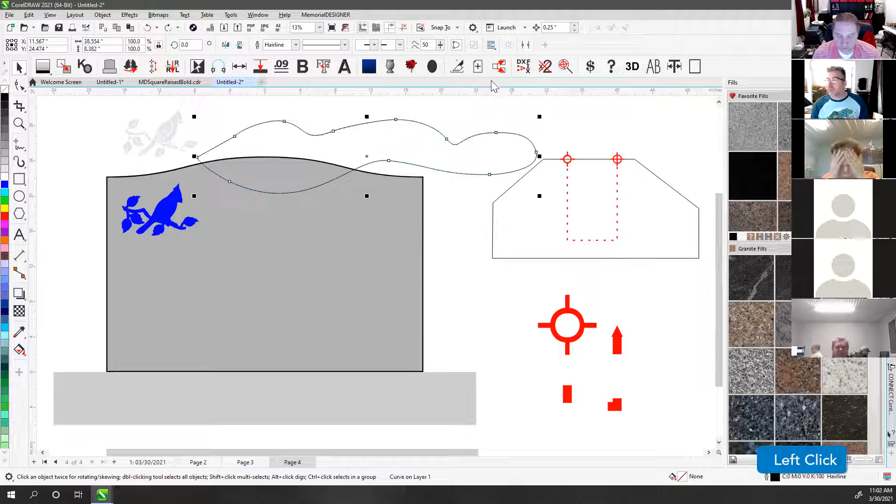Cameron, yep, if I wanted to take off that front leaf of that bird right there—yep, I would hit break apart. You can click break apart. That's going to break it all up into the individual pieces.

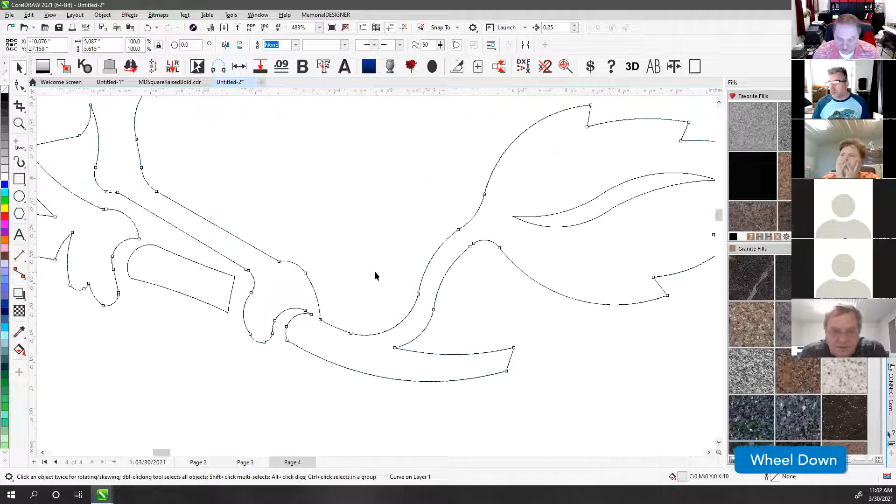But then what happens is you'll notice here that the leg is actually attached to that front leaf. So it's not going to let me move that much of it, because it's connected right there, that's what it's going to do. So in this particular case, breaking it apart isn't going to really let me delete that because it's connected to the rest of the stuff.

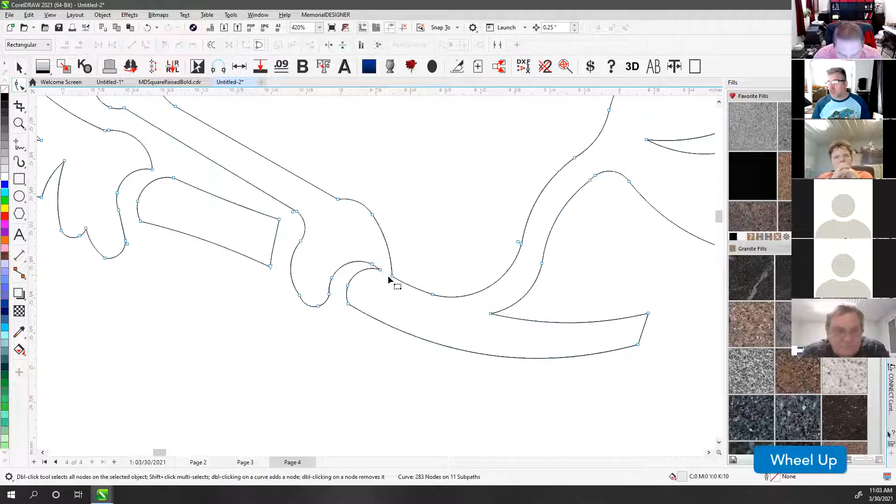If this wasn't connected, if we actually broke apart on the node level—breaking apart that node and that node—now we can separate these pieces. So we've got that one and this one separated, and this one and that one. As long as there's a gap between those, when we break it apart, it's going to be its own object all by itself that we can select and get rid of. But because it was connected to that other piece, that wouldn't have worked.

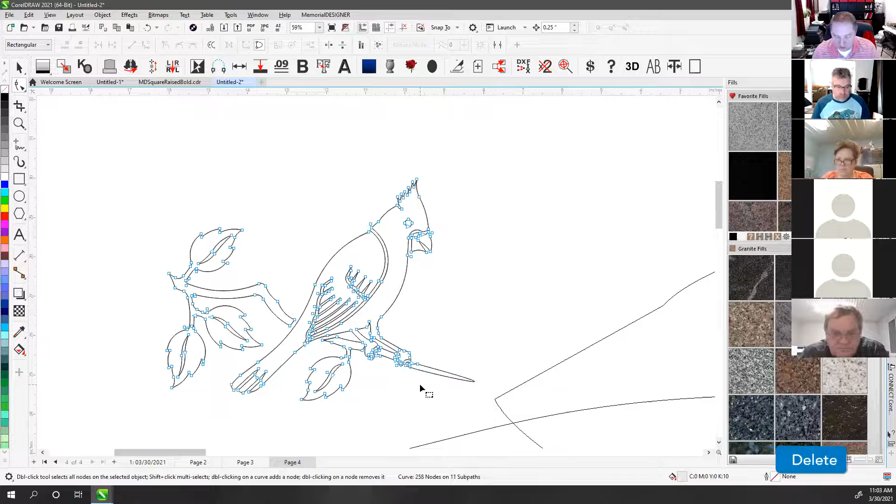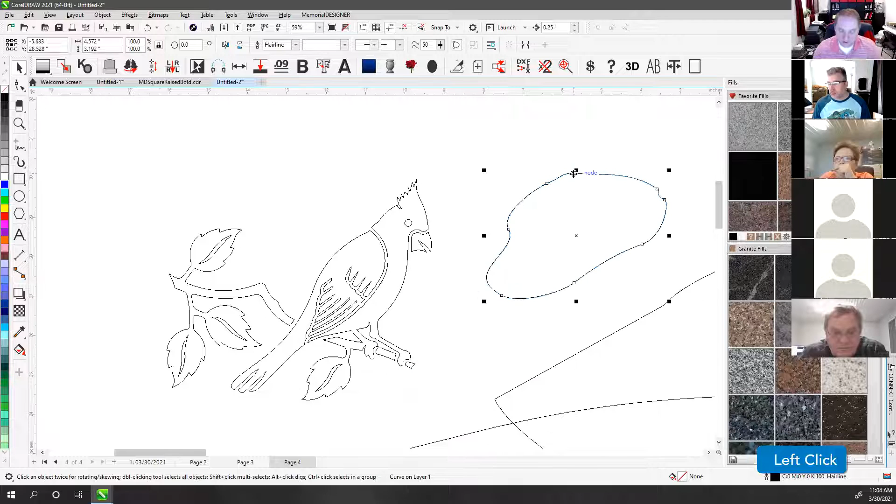So in that case, you're like, well, how do I get rid of it? There are different ways you can get rid of things. You can use the shape tool to grab the nodes and hit delete. You can use the eraser tool to come in and just erase it. Charlie uses one I don't use very often: he'll grab another piece like this, shift select this one, and do what's called a trim—that will cut it away based off of this. So there's all sorts of different ways you can cut things out or get rid of things.

But yeah, just breaking it apart in that particular instance wouldn't have done any good.

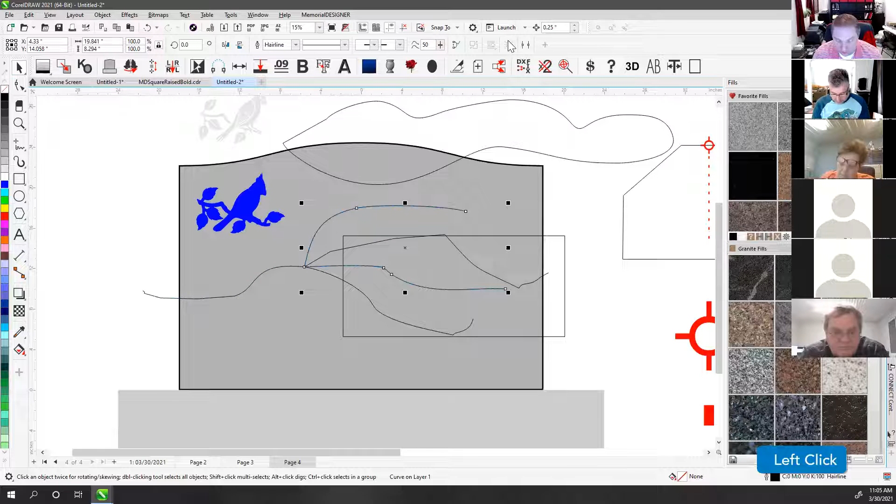The last one is, well, bounding box didn't show up on this one. But it does show up on our curve tools. The reason for that is when you're drawing freehand, if you have this not depressed, it shows the bounding box, which are these handles. If I'm in drawing mode and trying to draw things, these get in the way more often than not. So I turn those off while I'm drawing so I don't have to worry about accidentally touching them. So I turn the bounding box off while drawing, but it'll show back up if I'm using the pick tool, for instance. That's what that is on the property bar.

With curve tools, the last other thing is parallel drawing. This is not in older versions of CorelDRAW, but in the newer versions you can do parallel drawing where it'll pop up a parallel drawing toolbar, and basically you're drawing parallel lines while you're drawing. We won't get into that for this video because it would take too much time, but that is an option.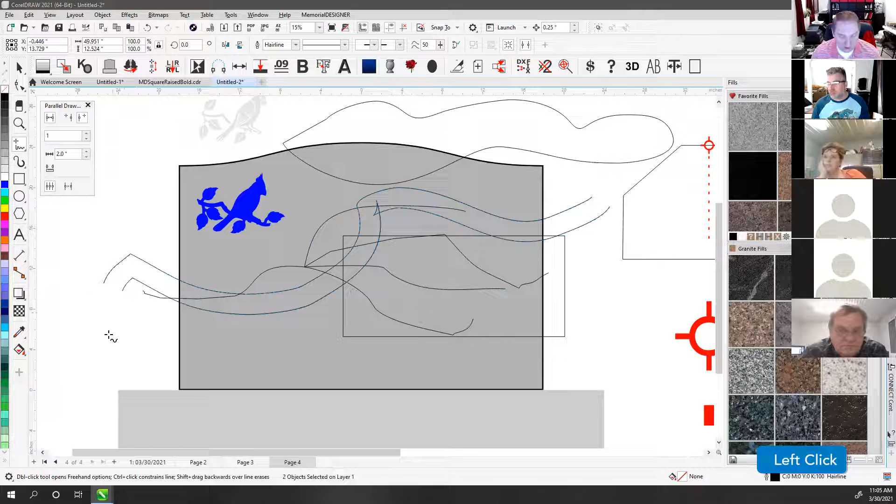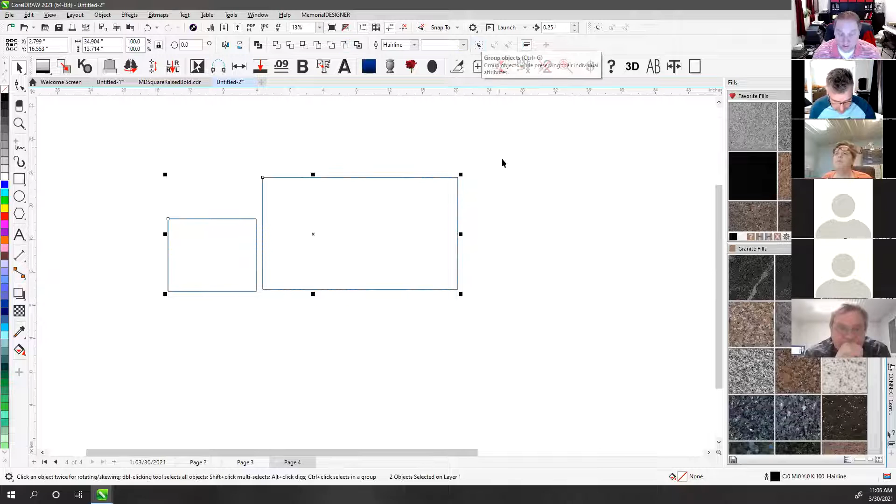As you can tell, there's a lot in this property bar because it's so interactive and so unique to whatever tool you're using. There's way too much to cover in one video, so we'll have to do it every time we're using a different tool and cover what's on the property bar for that particular tool. But I do want to point out that as you change your tools, your property bar is going to change to match that tool, or as you have certain things selected, your property bar changes based on your selection. That's why it changes so often, because it's trying to give you quick access to the tools you need as you need them, as opposed to going and searching for those tools. Does that all make sense?

Does anybody have any questions or comments or anything you want to see that we didn't show? Will you just give me the definition of curves? I mean, I don't mean to sound like a dinosaur, but... No, that's a good question.

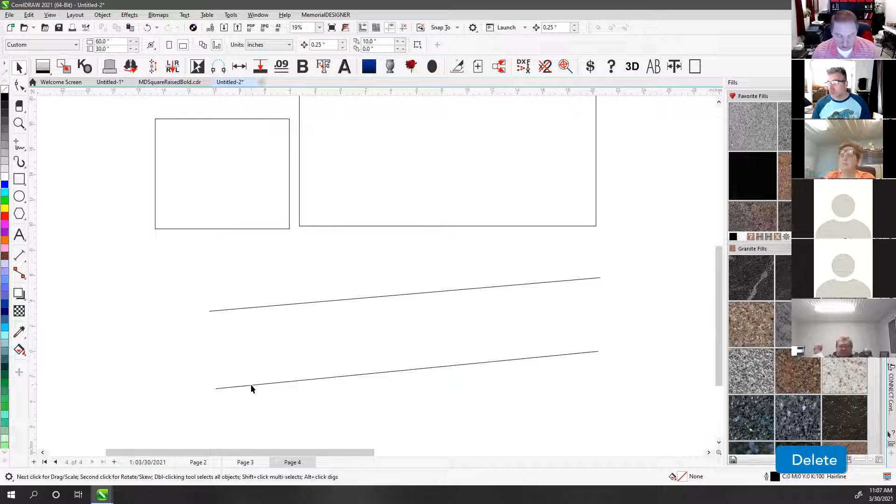So a curve, if I use one of these drawing tools, you can have one of two things: a curve or a straight line segment. If I click once with my freehand, let go of the click, but move my mouse, it's going to draw what's called a straight line segment. I really want to turn off my parallel drawing while I do that. Normally it's going to draw a straight line segment, a straight line from this point to this point that has no curve at all. It's just a straight line from here to there.

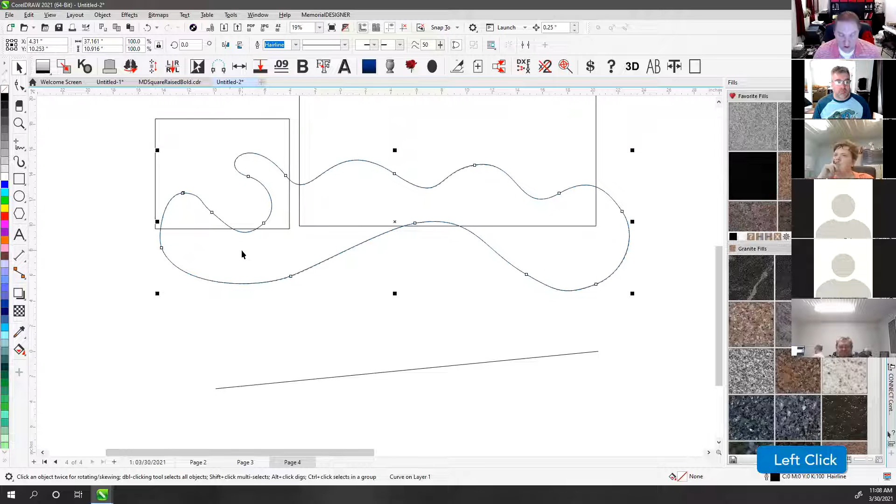If I'm using the same tool and instead I click and drag, it lets me draw freehand, so I can draw any shape that I want. Because I can draw any shape, this is called a curve. Now it gets a little tricky because I can take this straight line segment and it says that it's a curve, because technically it is a curve. It's just a straight line segment of a curve.

On the toolbar, when we're looking at the shape tool, this up here tells us whether it's a straight line. This is grayed out because it is a straight line. This one is showing because it lets us convert that to a curved segment instead of a straight line segment. So if I click on it, now it's a curved straight line segment, but it's not curved at all. It's just giving me the ability now to change and curve things, whereas before I didn't have that ability because it was a straight line segment.

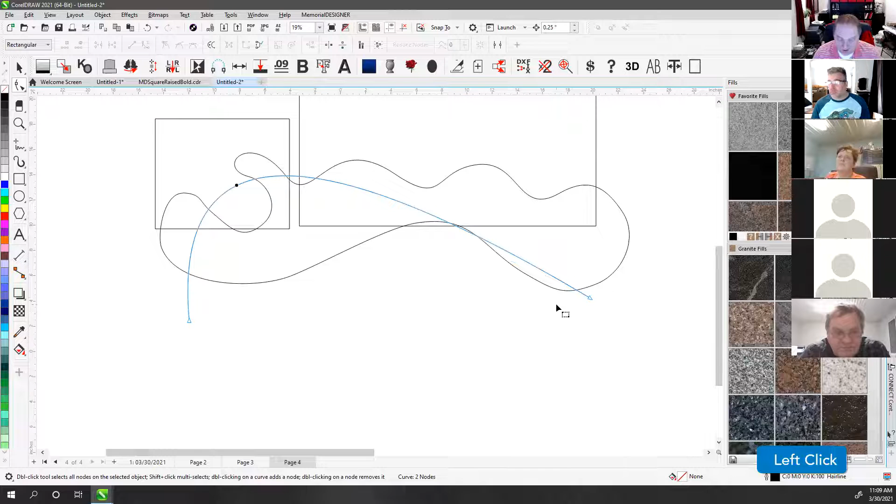If I clicked on it, it's going to move it as opposed to give me the ability to reshape it. So if I click on the node, it's going to move the node. If I click anywhere on the line, it's going to move the line. Whereas if this was a curved segment, it's going to bend based on where I grab it and pull. So that's a very good question, but that's the difference between a curve and a line segment, or a straight line segment of a curve.

The reason those are curves is because they're not also some special object like this, which is an ellipse. Ellipses are special because, just like the rectangle we had, you've got the ability to do things with your ellipse that you wouldn't be able to do with a curve, like change it to a pie, or change it to an arc, or change how many degrees from your starting and ending point. These kinds of things apply to your special ellipse shape that don't apply to your regular curves. I'd consider those objects to be intelligent objects.

And once you convert it to a curve... will you draw a square, please? If you draw a square, even though it's still considered a rectangle, it's a square because it's the same left and right. And this is the rectangle tool over here.

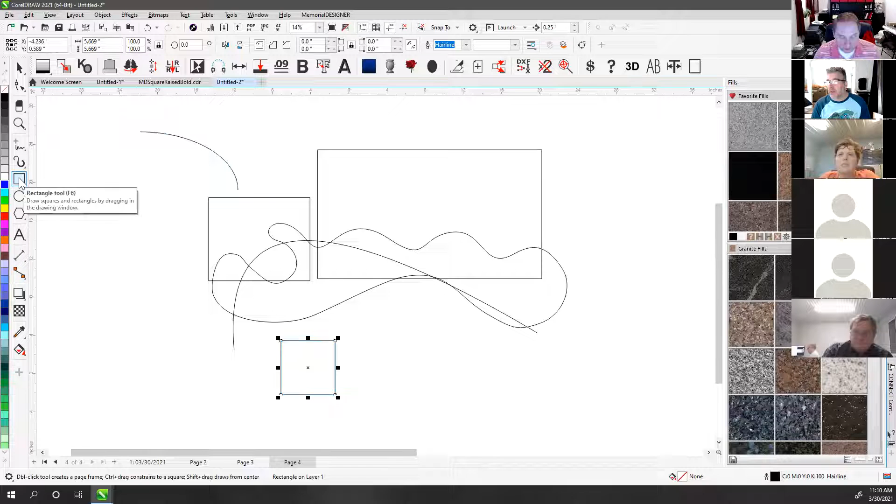And then if you hit the node edit tool, or F10 for the shortcut, he can grab the corners. Can you zoom in there a little bit, please? See how he just moved the corners? See how it rounded?

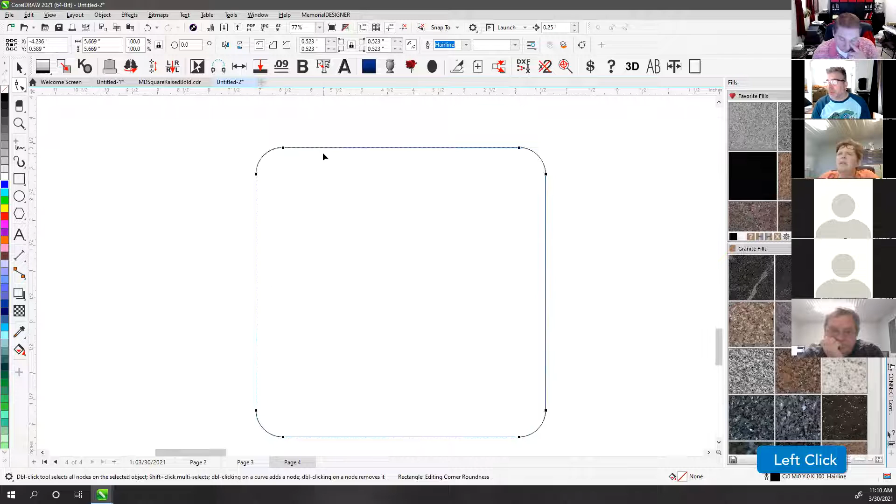Now do me a favor, Cameron — make that one a color, then duplicate it and make the second one another color. Thank you, sir. Now go ahead and edit the blue one again. See how he's moving that, everybody?

Now click on the red one and go ahead and convert that to curves. Once he's converted it to curves, it's still pretty smart looking, but it's not intelligent anymore. Now would you move a node, please?

Same thing with certain shapes — your basic shapes, triangle, circle, ellipse, rectangle, polygon, star, whatever — you can do some pretty cool things with those smart objects. Once you convert it to curves, it's no longer able to do that.

Now, one more thing, Cameron — could you just type a word, any word, like 'Julia,' and make that a color? You can change the font. So we're working with text now, right? You can change the size, change the font, do whatever.

As soon as he converts it to curves, watch what happens. Now convert that one. When he clicks on 'Julia' up above, the one that's still text, see how it even gives him the option to choose the text and adjust it? But now when he clicks on the bottom version, which has been converted to curves, it's no longer text — it's objects, made of curves.

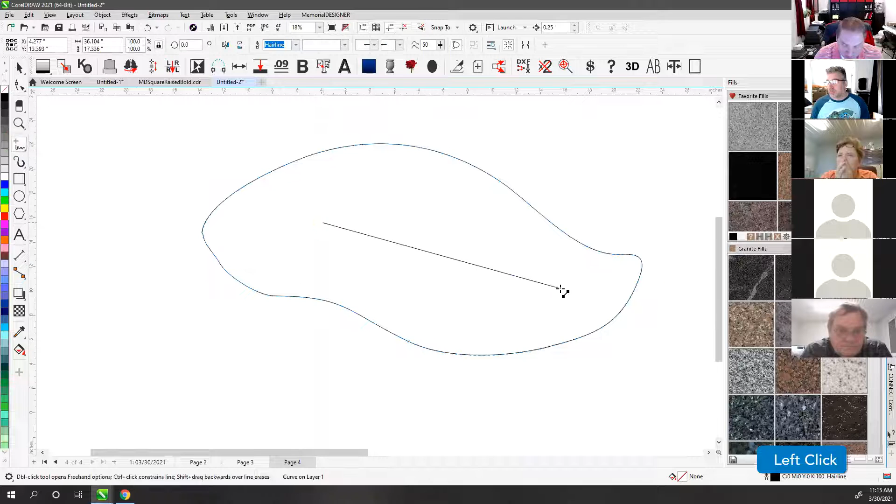But this is going to lead me to something else - tell me the difference between nodes and control handles. One's circular and one's a square, right? No, so the difference is, each of these things here is a node. A node is your starting and ending point of your line or your curve. So here's your beginning, here's your ending - those two things are called nodes.

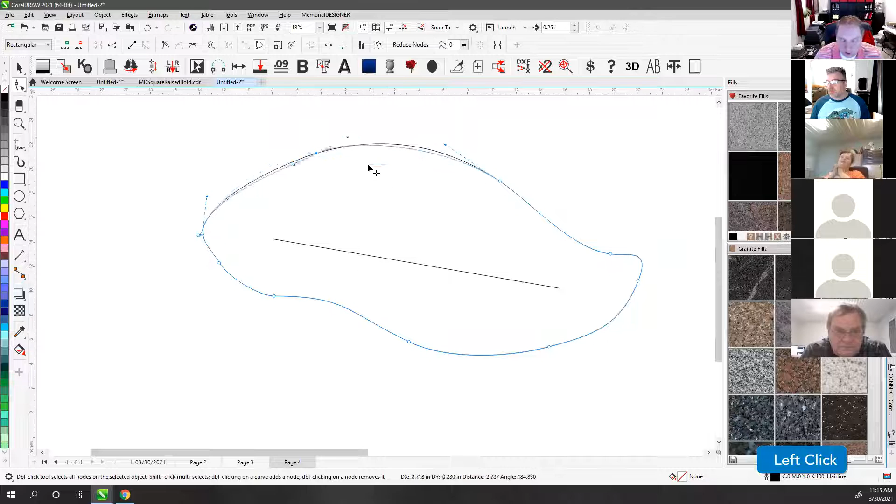Now the control handle - if you click on a node, it gives you dotted lines that let you control the way that it curves. Oh okay, so they're called control handles because they're handles you click on that control the curvature of your item. Good deal. See, look how much I learned today - a little while ago you didn't know it, now you know it. I am so smart.

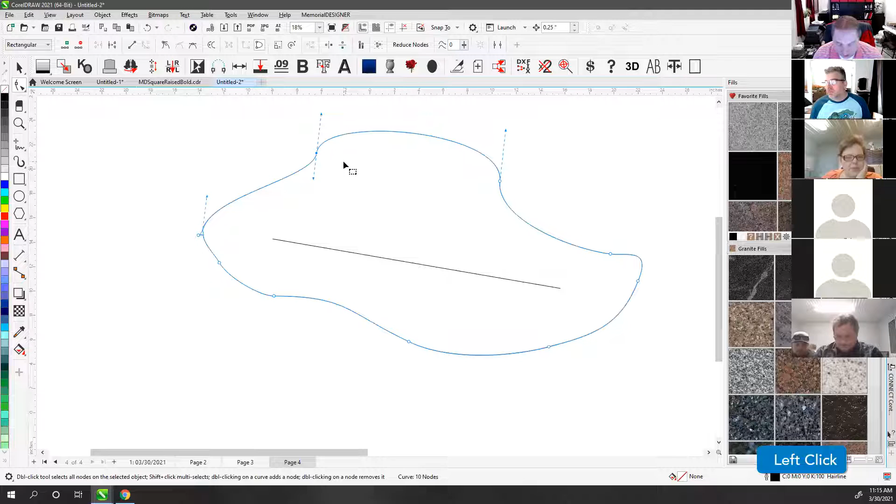So that's the difference, and these things are nodes, but there are different kinds of nodes. You mentioned circles and squares - that's dependent on what kind of node it is. You can have cusp nodes, which are the squares, you can have smooth nodes, you can have symmetrical nodes. Those have different shapes for the node itself, but they're all nodes.

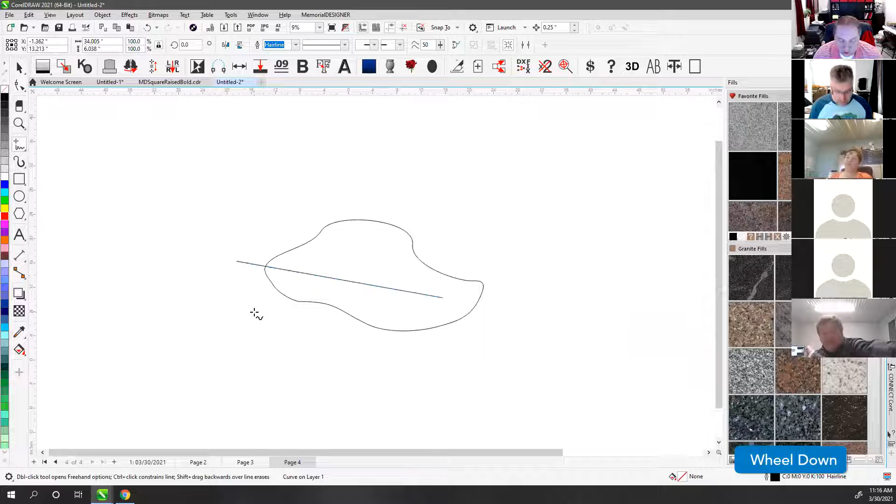And this one, like I was saying, because this is a straight line segment, it does not give me handles because there is no curve - there's no curve to control, so it's not going to give me a handle. If I were to add to this line by creating a curve attached to it, and click on this node, it'll give me handles for these sides because those can curve, but it's not going to give me handles for this side because this is a straight line segment. It'll just let me click and move it - it's not going to let me curve it because it can't curve, it's not a curve.

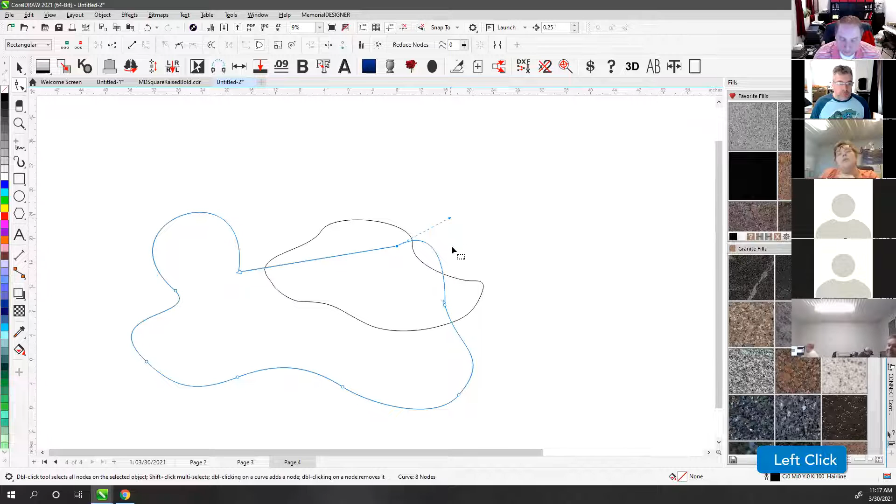So now are you drawing all this on your drawing tablet? I mean right now I'm just using my mouse. But technically, the screen I'm using is my drawing tablet screen.

Let's see, any other questions? That was a good question. I really like those questions, Julia, because it's really the beginner's stuff - it's vernacular, terms you don't use in normal language. It's specific to this program, so it's really good to learn what those terms mean.

And you guys are so used to it, and for somebody coming in who really knows nothing - even just finding out what a node is, you kind of think you do, but it's nice to get the clarification. Sometimes, and I'd say more often, a new person will ask a question, and after researching it I learn things too - I'm learning all the time, Cameron's teaching me stuff all the time. Every so often I'll stumble across something and go, hey, this, and Cameron's like, oh that's interesting. So it's the collective of everybody talking together - we're going to learn even more, so it's wonderful.